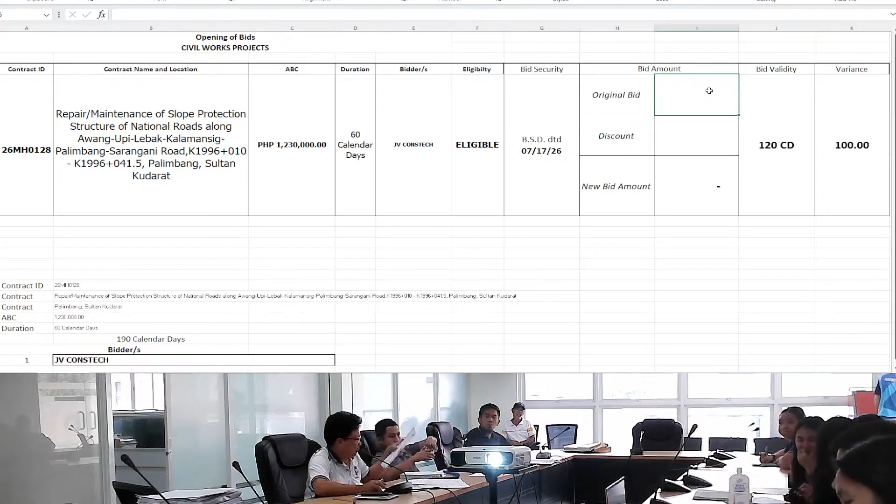For its bid offer, the total bid price of JV Constech for contract ID 26MH0128 is 1,228,300 pesos and 6 centavos. No discount offered.

Now we have no bid proposal to open. I would like to remind the bidders that your documents still undergo the post-qualification and the result of this bidding is still not final. And for the other matters from our BAC member, TWG or Secretariat.

For the information, we have a pre-bid conference today for July 22, 2026 for 10 projects. And also we have an opening of bids to be scheduled on July 28, Tuesday 2026 for 8 civil works projects.

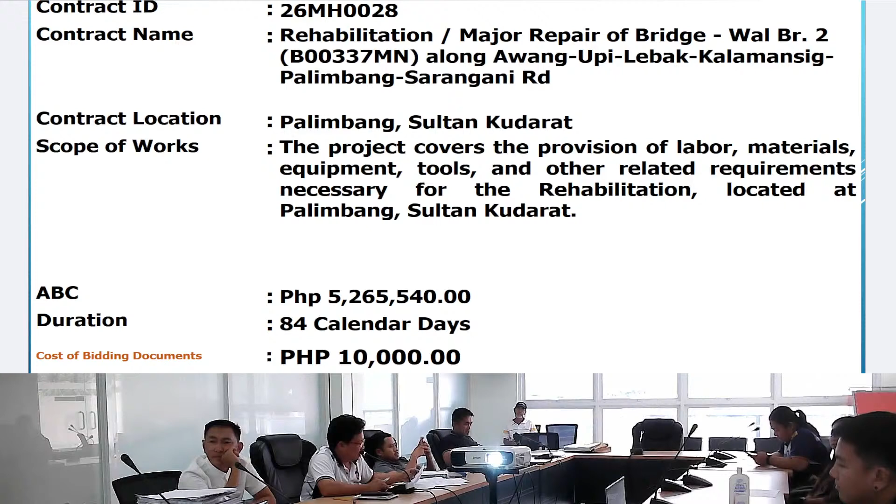Then 26 MH 0030, widening of bridge, Gapok Bridge, along Isulan Junction, Ninoy Aquino Road, with an ABC of 26,468,820 pesos. And 26 MH 0036, construction of concrete road to Kaabay Sirapinang Road, Bagumbayan, SK in support of the agri-based industries, pineapple, coffee, rubber, corn, and muscovado processing plant.

Station 14 plus 401 to Station 15 plus 176, Bagumbayan, Sultan Kudarat, with an ABC of 23,234,820 pesos. For the next project is the 26 MH 0037, construction, completion of bridge phase 3, Station 0 plus 00 to Station 0 plus 140, Barangay Kalamungog, Lebak, Sultan Kudarat, with an ABC of 24,125,000.

And for the next project is the 26 MH 0043, concreting of road, Barangay Kulaman, Barangay Kiadsam, Barangay Midtungok, Station 0 plus 00 to Station 1 plus 00, Senator Ninoy Aquino, Sultan Kudarat, with an ABC of 23,568,195 pesos.

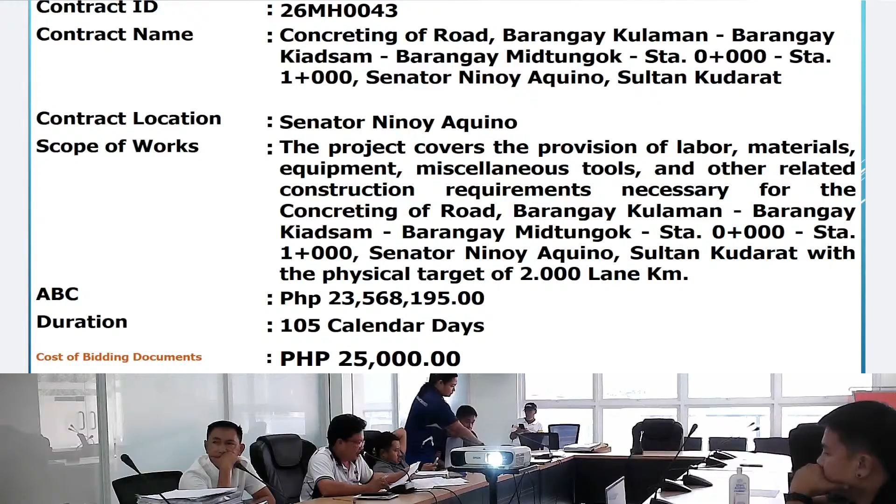And for the next project is the 26 MH 0044, construction of drainage structure along road, Station 0 plus 00 to Station 0 plus 650, Barangay Santa Maria, Kalamansig, Sultan Kudarat, with an ABC of 4,230,455 pesos.

For the next project is the contract ID 26 MH 0064, construction of multipurpose building, Barangay Kapilan, Lebak, Sultan Kudarat, with an ABC of 6,930,000. And for the next project is the 26 MH 0094, construction of multipurpose building, Barangay Batang, Baglas, Palimbang, Sultan Kudarat, with an ABC of 4,950,000.

And for the rest project is the 26 MH0123, improvement of DPWH Sultan Kudarat Second District Engineering Office, main building, Lebak Sultan Kudarat, with an ABC of 34,300,000. So now I will give the floor to the planning engineers for the basic contract data as well the discussion of plans.

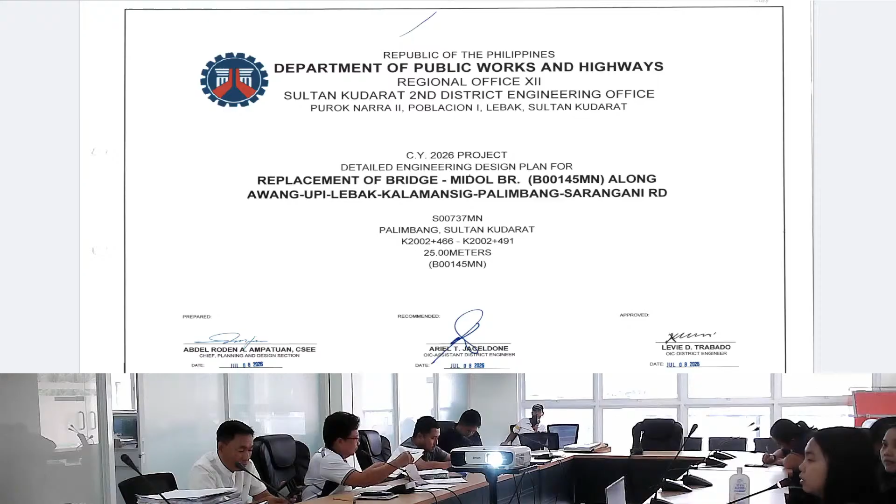So we have here with a physical target of 25 meters. So here is the index of sheets. And the summary of quantities for the individual removal of trees with 150 to 300 mm diameter small, we have 8 each. For the removal of structures or obstruction for steel, we have...

23,724.53 kilograms. For the removal of structures or obstruction for concrete, we have 63.32 cubic meters. For the structural excavation of common soil, we have 243.36 cubic meters.

For the bridge excavation for common soil, we have 59.61 cubic meters. For the shoring, cribbing, and related works, we have one lump sum. For the embankment from borrow common soil, we have 2,455.28 cubic meters. For the aggregate sub-base course, we have 518.93 cubic meters.

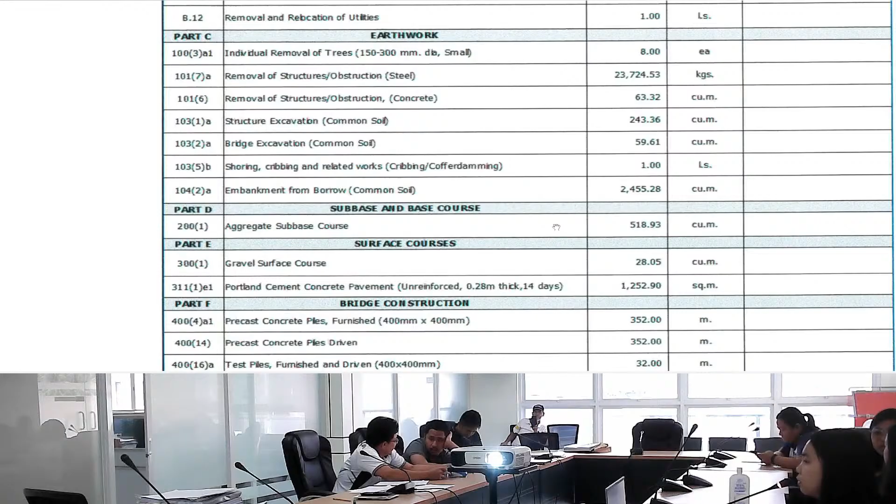For the gravel surface course, we have 28.05 cubic meters. For the Portland cement concrete pavement with 0.28 meter thick, we have 1,252.90 square meters. For the precast concrete piles furnished, we have 352 meters.

For the precast concrete piles driven, we have 352 meters. For the test piles furnished and driven, we have 32 meters. For the pile shoes, we have 24 each.

For the reinforcing steel grade 40, we have 2,483.22 kilograms. For the reinforcing steel grade 60, we have 39,347.20 kilograms. For the structural concrete, with 20.68 MPa, we have 5.44 cubic meters.

For the structural concrete with 27.58 MPa, we have 237.17 cubic meters. For the pre-stressed structural concrete members, we have 4 each. For the elastomeric bearing pads, we have 8 each.

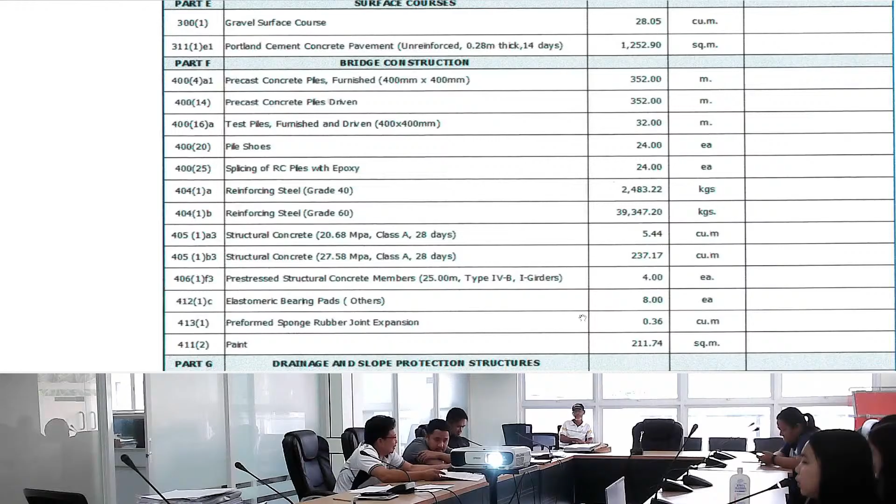For the pre-formed sponge rubber joint expansion, we have 0.36 cubic meters. For the paint, we have 211.74 square meters. For the grouted riprap, we have 344.50 cubic meters.

For the concrete for slope protection, we have 20.54 cubic meters. For the deck drain, we have 8 each. For the tapered solar LED roadway lighting, we have 6 each.

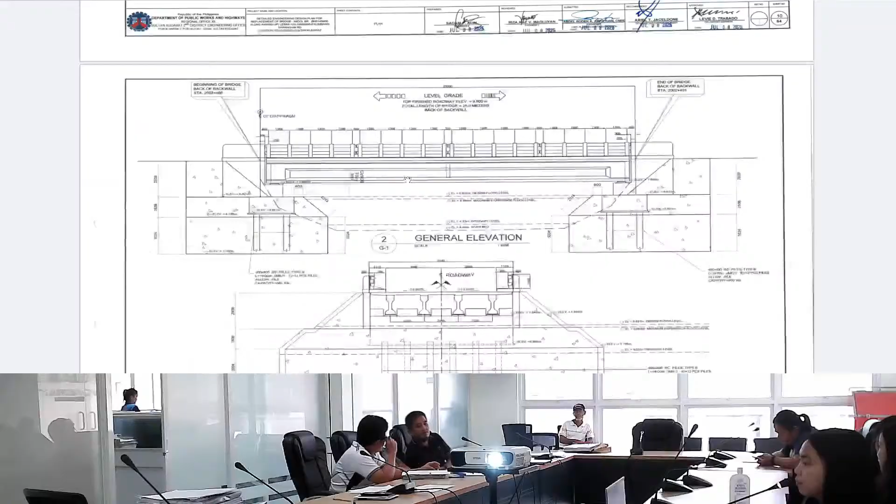So here is the quarry map, the vicinity map, the geolocation map of this project, the general notes, the topographic plan, the plan for the abutment, the general elevation and its typical section, the pile splice detail, the elevation, the pile tip for hard driving.

You have here the welded spiral tie splice detail in the notes. So we have here the framing plan showing top reinforcing steel bars and the framing plan showing the bottom reinforcing steel bars.

So we have here the longitudinal section, the transverse section at the middle of span, and the transverse section at support. So we have here the reinforcement schedule and estimated quantities for superstructures, the pre-stress girder elevation, the section at mid-span, section at end block, and the tooth at end view.

Here's the tooth detail, the end block reinforced detail, the dowels at the end and mid block. So we have here the girder design guide and the camber diagram.

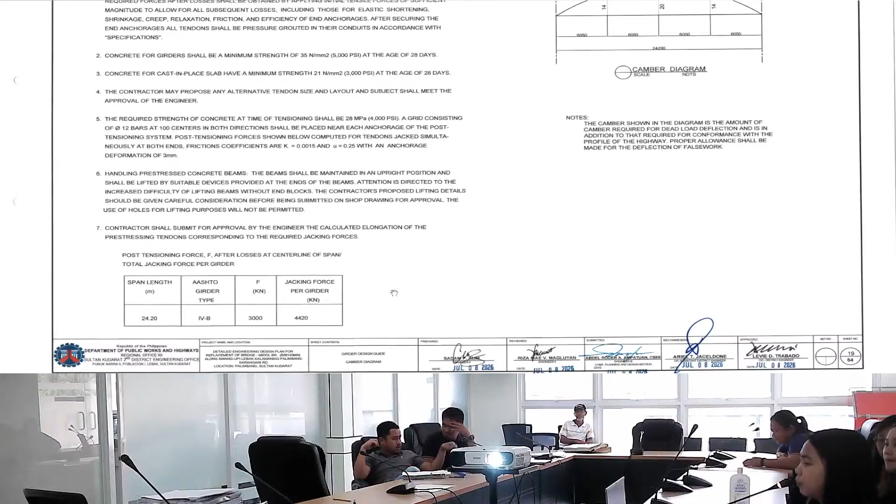We have here the details of diaphragm at the middle, its transverse section at abutment, the elevation and section, the reinforcement schedule and estimated quantities for superstructure, plan in the section, the elevation abutment detail, and the elevation wing wall detail.

You have here the pile cap plan section, the pile cap section, the shear block and riser plan, the shear block section, and the shear block and riser elevation.

We have here the reinforcement schedule and estimated quantities for abutment.

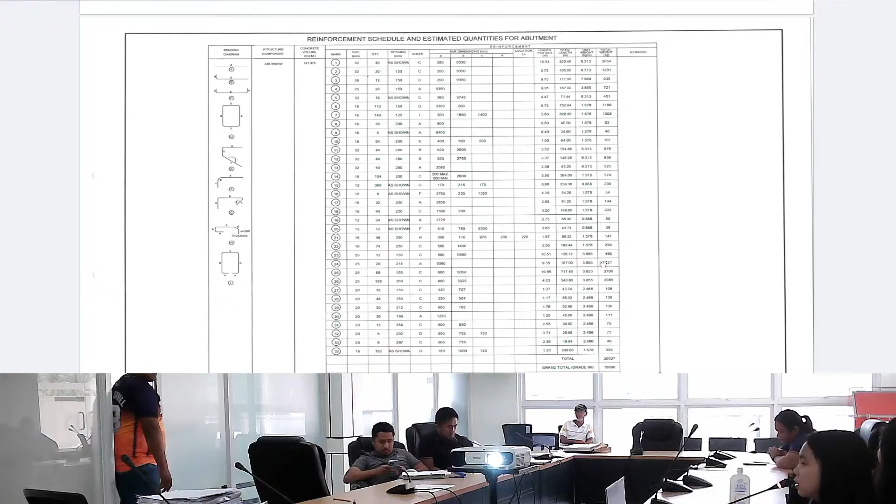We have here the plan for drain pipe, the sidewalk detail, its section, the typical drain details, its plan, and its section.

The approach slab plan and its section. We have here the reinforcement schedule and estimated quantities for the approach slab.

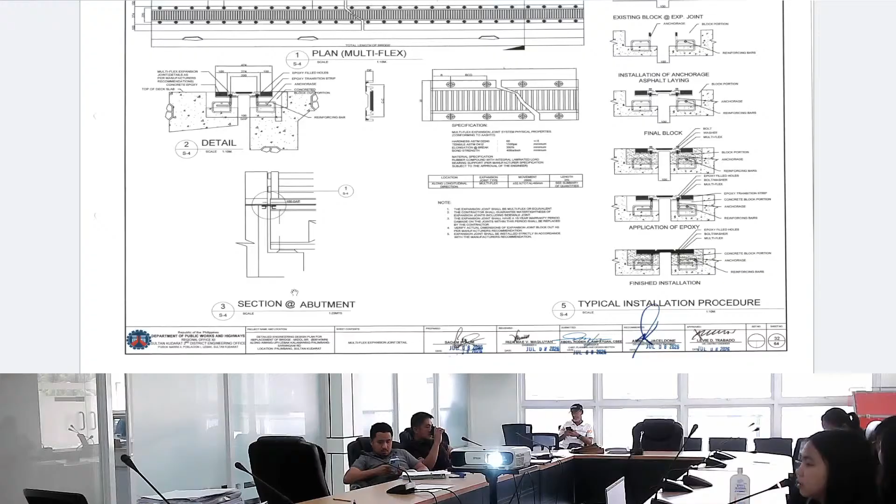We have here the Multi-Flex expansion joint detail, its section at abutment, and the typical installation procedure. Here is the reinforcement schedule and estimated quantities for approach slab.

We have here the general plan, standard painting on railing, sidewalk, and wing wall.

Here is the plan for the white paint, and the white paint on chamfer facing the center line and its rear elevation. So we have here the front elevation and the text detail.

We have here the details of abutment protection 1 and the details of abutment protection 2. We have here the bar bending diagram of abutment protection.

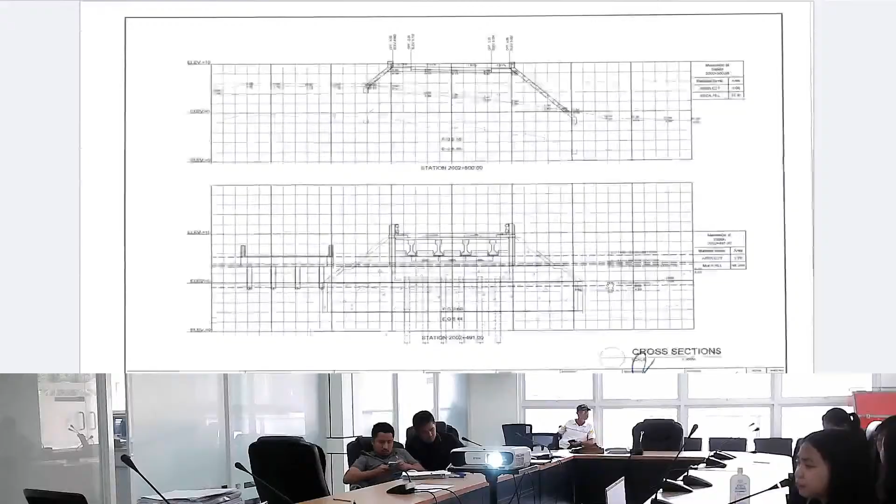The boring log, and the general plan. The cross sections, we have here the river profile.

We have here the typical road section and the typical roadway section, full super elevation. We have here the typical roadway section at grouted riprap slope protection.

We have here the grouted riprap typical detail and the detail of weep holes. We have here the detail of reinforced concrete RC pedestal, the detail of integrated solar street lights.

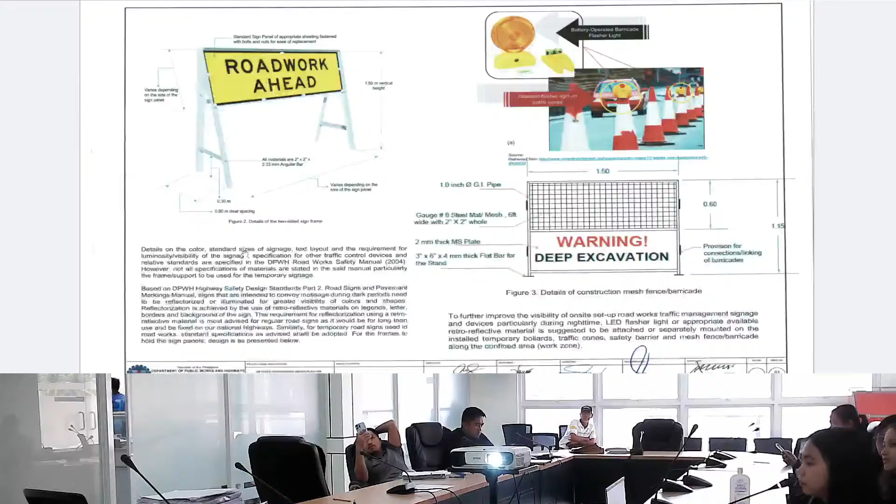We have here the traffic management plan, and the DPWH standard tarpaulin.

So the next is with the contract ID number of 26MH0030, with the contract name of widening of Bridge, Gapok Bridge B00613 MN along Isulan Junction to Ninoy Aquino Road, with the ABC of 26,468,820, with a physical target of 16.6 meters.

So for the summary of quantities, for the removal of actual structure obstruction, 910 mm diameter RCPC, we have 5 linear meter. For the removal of structures or obstruction concrete, we have 157 cubic meters. For the surplus common excavation, we have 510.51 cubic meters.

For the structure excavation of common soil, we have 134.16 cubic meters. For the bridge excavation common soil, we have 208.31 cubic meters. For the shoring, cribbing, and related works, we have 1 lump sum.

For the embankment from borrow of common soil, we have 177.45 cubic meters. For the subgrade preparation of common materials, we have 730.30 square meters.

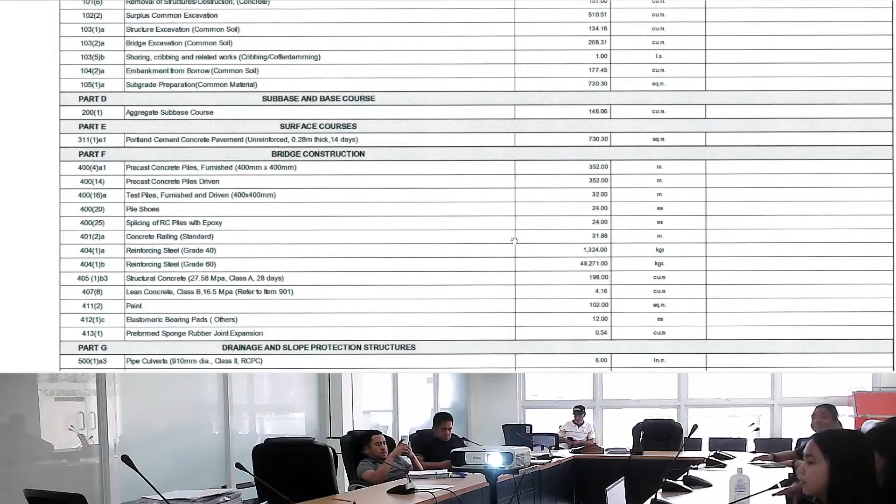For the pile shoes, we have 24 each. For the splicing of RC piles with epoxy, we have 24 each. For the concrete railing standard, we have 31.88 meters.

For the reinforcing steel grade 40, we have 1,324 kilograms. For the reinforcing steel grade 60, we have 48,271 kilograms. For the structural concrete, we have 196 cubic meters.

For the lean concrete, we have 4.16 cubic meters. For the paint, we have 102 square meters. For the elastomeric bearing pads, we have 12 each.

For the preformed sponge rubber joint expansion, we have 0.54 cubic meters. For the pipe culverts of 910 mm diameters, we have 6 linear meter. For the grouted riprap, we have 52.38 cubic meters.

For the sheet piles steel for slope protection, we have 246 linear meters. For the concrete for slope protection, we have 47 cubic meters.

For deck drain type 1, we have 8 each. For the reflectorized thermoplastic pavement markings white, we have 40.08 square meters. For the reflectorized thermoplastic pavement markings yellow, we have 40.08 square meters.

So we have here the index of sheet and the quarry map. Here is the location map, the vicinity map, and the geotag photo.

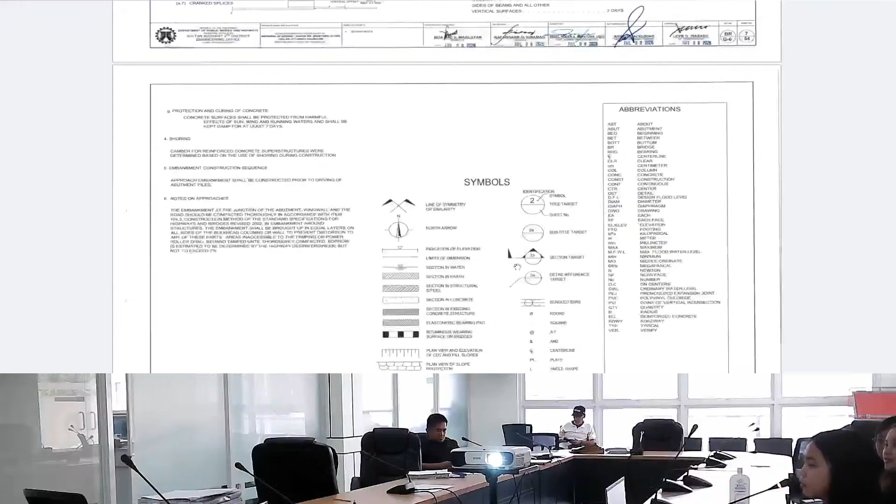So here is the topographic plan, the general notes, the general plan, the general elevation, and the typical cross-section at abutment A.

The cofferdamming detail, so here is the plan, the elevation, and its section. We have here the roadway profile and the river profile. The river cross-section.

We have here the bore log.

We have here the framing plan showing top reinforcing steel bars, and here is the framing plan showing bottom reinforcing steel bars and the longitudinal section. We have here the typical cross-section.

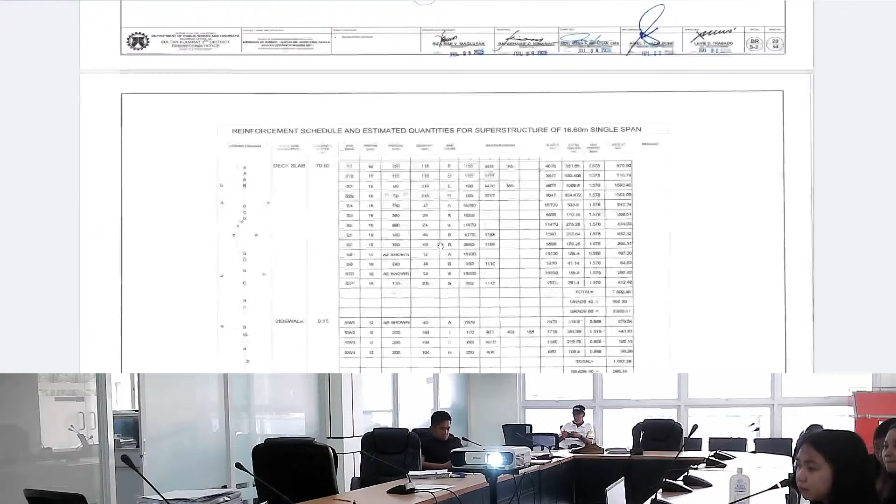Here is the diaphragm at support detail, its elevation, the section, and the intermediate diaphragm detail, along with its elevation and section.

Here is the reinforcement schedule and estimated quantities for superstructure of 16.6 single span, and its plan and section for the concrete pouring sequence.

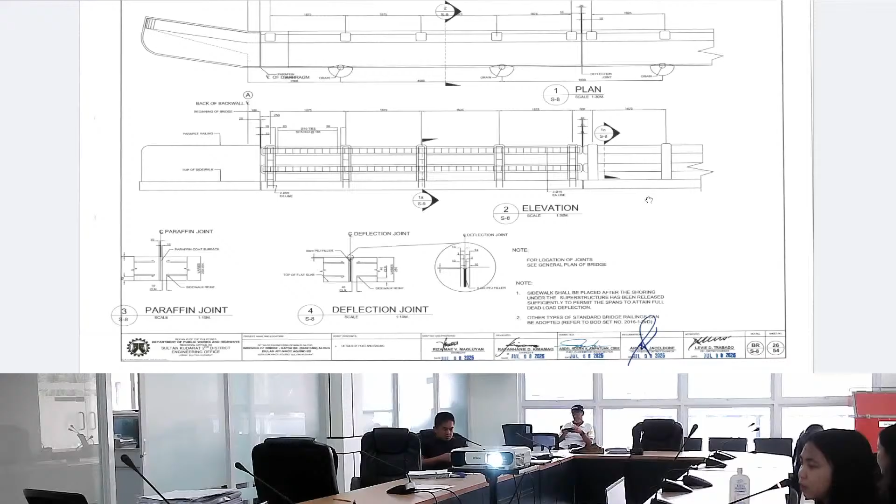Here we have the details of post and railings, the plan, the elevation, the paraffin joint, deflection joint, and the railing details, including the section, sidewalk detail, reinforcement schedule, and estimated quantities for railing.

Here is the typical drain details, its plan and section.

Here is the abutment plan, and in this area, the abutment section. Here is the pile cap plan, wing wall section, elevation of wing wall, and the shear block and riser plan.

Here's the reinforcement schedule and estimated quantities for the abutment, along with the pile elevation, pile splice detail, and the pile tip for hard driving.

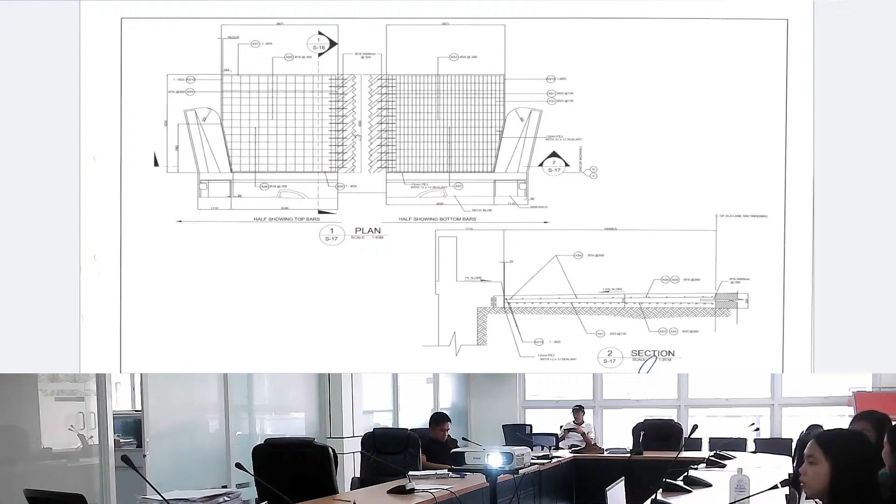We have here the approach slab detail, its plan and section, and the reinforcement schedule and estimated quantities for the approach slab.

We have here the plan for the standard painting, the road cross-section, and the typical roadway section in its quantity sheet.

We have here the abutment protection detail, the end cover of abutment protection section at abutment B downstream, and the details of the end cover of abutment protection at abutment B downstream section B.

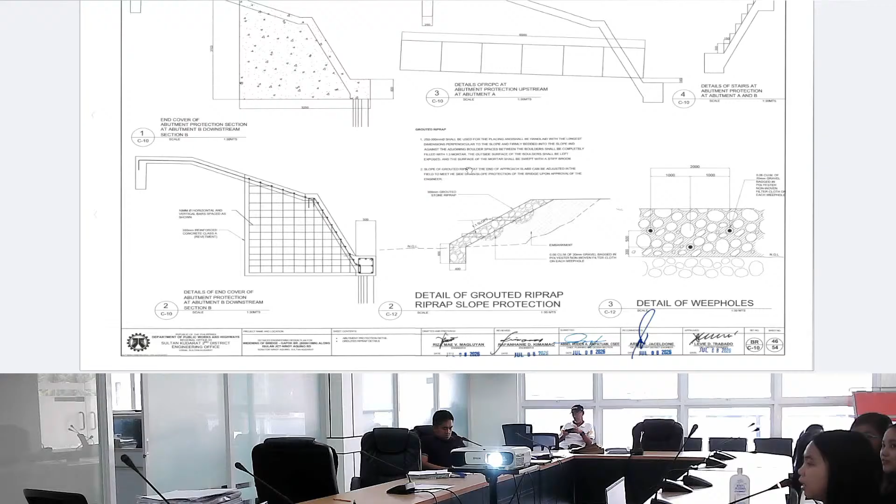Here is the details of RCPC at abutment protection upstream at abutment A, the abutment at A and B, and the detail of weep holes. We have here the detail of 1,220 mm diameter RCPC installation.

Here's the standard DPWH billboard.

Next is the contract with ID number 26MH0044, with the contract name: construction of drainage structure along road, station 0+00 to station 0+650, Barangay Santa Maria, Kalamansig, Sultan Kudarat, with a physical target of 0.650 kilometers. We have here the index of sheet and the quarry map.

For the summary of quantities: removal of actual structures or obstruction with 910 mm diameter RCPC, we have 6 linear meters. For removal of structures, obstruction concrete, we have 17 cubic meters. For unsuitable excavation, we have 521.59 cubic meters. For reinforcing steel grade 40, we have 5,781 kilograms. For structural concrete, we have 124 cubic meters. For pipe culverts of 910 mm diameter, we have 6 linear meters. For pipe culverts of 1,220 mm diameter, we have 6 linear meters.

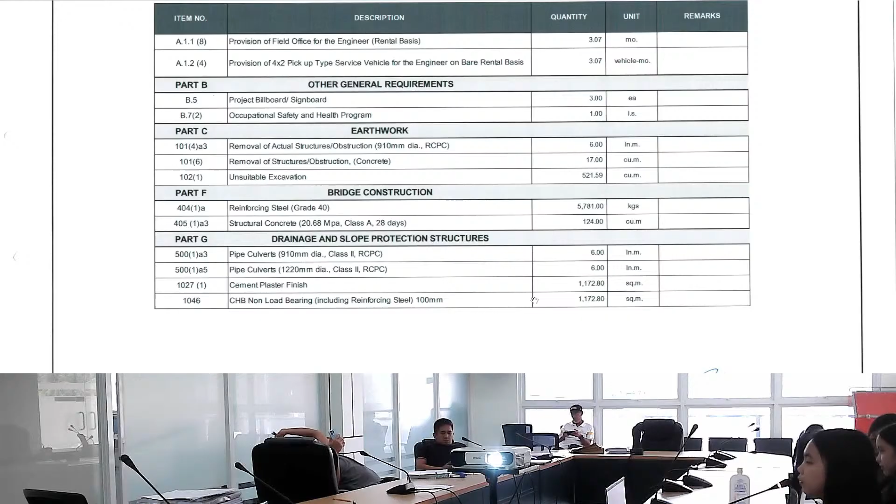We have here the general notes, the vicinity map of the project, the general plan, the geolocation plan, the typical sections at RCPC of 1,220 mm diameter junction, and the typical section of line CHB canal.

We have here the detail of the line canal, the typical section, the detail of the line canal, the line canal profile, the line canal traverse plan, and the typical section of the line CHB canal.

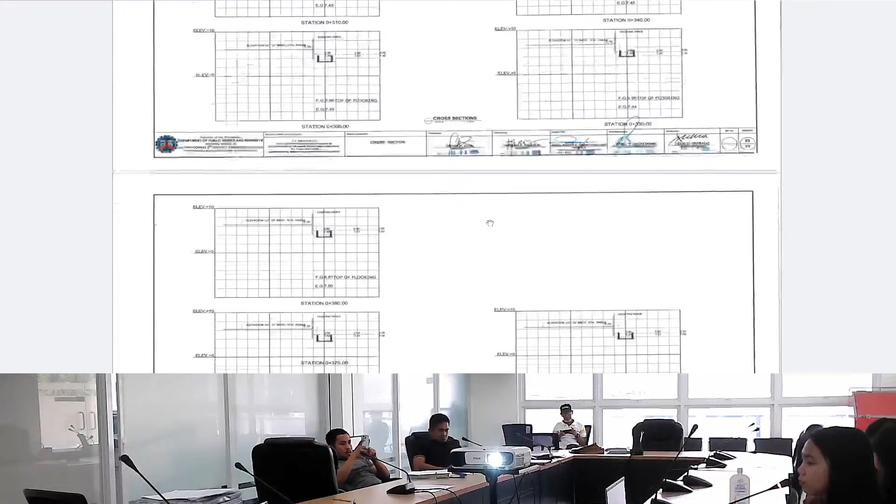We have here the cross sections, and the standard DPWH tarpaulin.

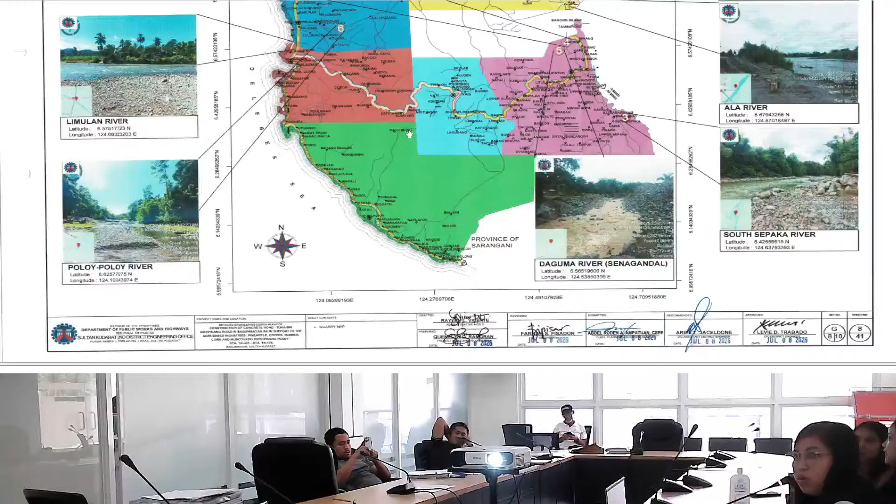Next would be the quarry map. And here is our summary of quantities.

For our earthworks, we have individual removal of trees, 150 to 300 mm diameter, small, we have 23 each. Unsuitable excavation, we have 1,748.42 cubic meter. Structure excavation common soil, we have 218.44 cubic meter.

Embankment from borrow, we have 1,451.99 cubic meter. And subgrade preparation common material natin, we have 7,134.40 square meter.

And for our sub-base and base course, we have aggregate sub-base course with 1,669.61 cubic meter. And for our surface courses, we have Portland cement concrete pavement.

Yung unreinforced one natin, we have 0.15 meter thick, 14 days, with quantity of 2,325 square meter. And for our Portland cement concrete pavement, unreinforced 0.23 thick, 14 days, we have 4,837.30 square meter. And next would be the reinforcing steel grade 60 natin.

We have 9,989 kilograms. And for reinforcing steel grade 40 natin, we have 5,908.60 kilograms. And for structural concrete, 20.68 MPa, class A, 28 days, quantity of 349.70 cubic meter.

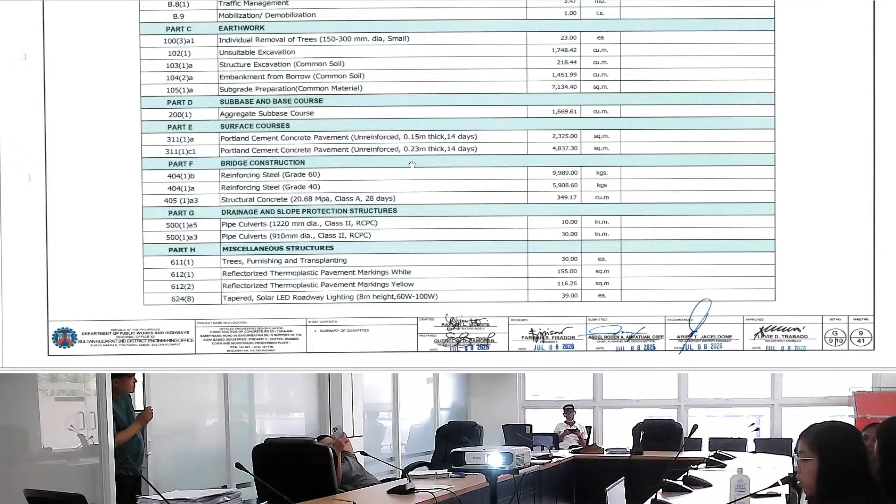And last, for our tapered solar LED roadway lighting, 8 meter height, 60 watts to 100 watts, we have 39 each. And next would be the quantity sheets of this project.

And next would be the typical roadway section. So we have RCBC and RCPC here, and we have canal. Next would be the straight line diagram of this project.

And next is the traverse plan and center line profile of this project. So makikita po natin dito yung stationings po, kung saan po na nakalagay yung mga RCPC and then yung RCBC po natin.

So next would be the typical pavement po ng ating PCCP. Next is the geometric design standards.

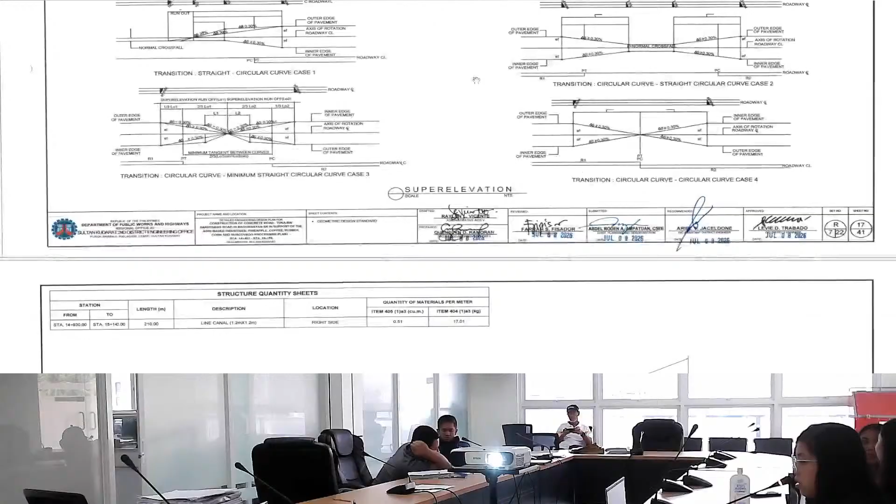And here is the detail of our reinforced concrete line canal with concrete planks po. So nandito rin po sa upper side, sa left side yung kanyang station limits.

Next would be the detail of our catch basin. And next would be the detail of our landslide protection na retaining wall po natin.

And the detail of 910 mm diameter, 36 inches RCPC installation. So ito po yung sa detail na installation po ng RCPC. Next would be another detail po ng RCPC natin.

And nandito rin po yung schedule ng drainage po, yung kung anong station pong ilalagay po yung RCPC. Next would be the detail ng RCBC po natin, yung box culvert po natin.

So, ang next po ang RCBC detail po ng wing wall. And next would be the cross-sections of this project.

Detail po ng solar street light po natin. So, eto po yung mga general notes po ng street lights. And next would be the detail of pavement markings.

Next is ang traffic management po natin. Yung mga signages po natin sa site po, nandito po. And lastly, yung DPWH project billboard po at saka yung sa COA.

So next project we have contract ID of 26MA0037 with the construction completion of bridge phase 3, with the station 0+00 to station 0+140 at Barangay Kalamungog, Lebak, Sultan Kudarat, with an ABC amount of 24,125,000. And here is the detailed engineering design plan of this project.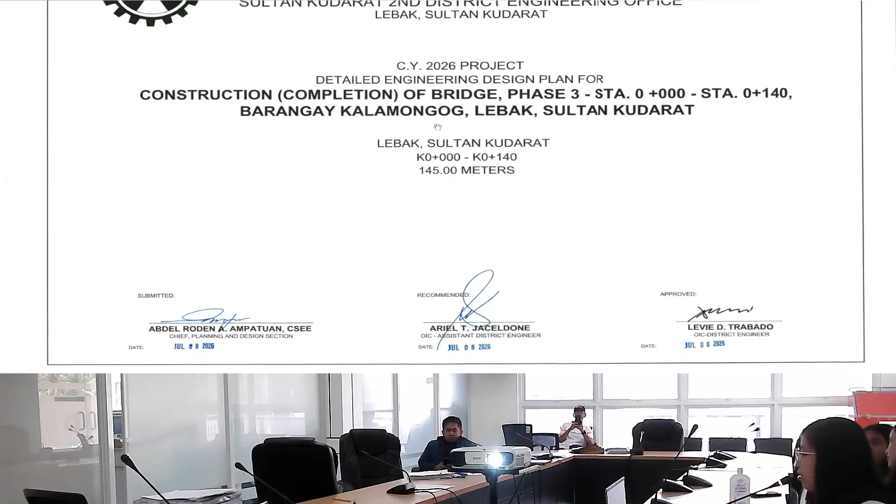So, phase 3 na po ito. Nandun na po yung hanging bridge natin. And then, mga additional po ito na structures po.

So, for our summary of quantities, we have earthworks, individual removal of trees, 301 to 500 mm diameter small. We have 10 each. Removal of structures of obstruction steel, 3,213.60 kilogram. And for removal of structures, obstruction concrete, we have 1 cubic meter.

And for structural excavation common soil natin, we have 357.70 cubic meter. And for bridge excavation common soil, we have 1,406.21 cubic meter. And for shoring, cribbing, and related works, cribbing and cofferdam, 1 lump sum.

Embankment from borrow, structure excavation common soil, we have 1,072.90 cubic meter. And for embankment from borrow na common soil, we have 487.38 cubic meter.

And next would be the precast concrete piles furnished natin, 400 mm by 400 mm, 273 meters. And for the precast concrete piles driven, 273 meters. Test piles, furnished and driven, 400 by 400 mm, 24 meters.

Piles shoes po natin, we have 27 each. And splicing of RC piles with epoxy, we have 11 each. Structural steel furnished, fabricated, and erected grade 50, we have 9,271.78 kilogram.

For structural steel furnished steel painting works, we have 1,126 square meters. For reinforcing steel grade 40, we have 179 kilograms. And for steel grade 60, we have 10,360 kilograms. And for structural concrete, 27.58 MPa, Class A, 28 days, we have 128 cubic meters.

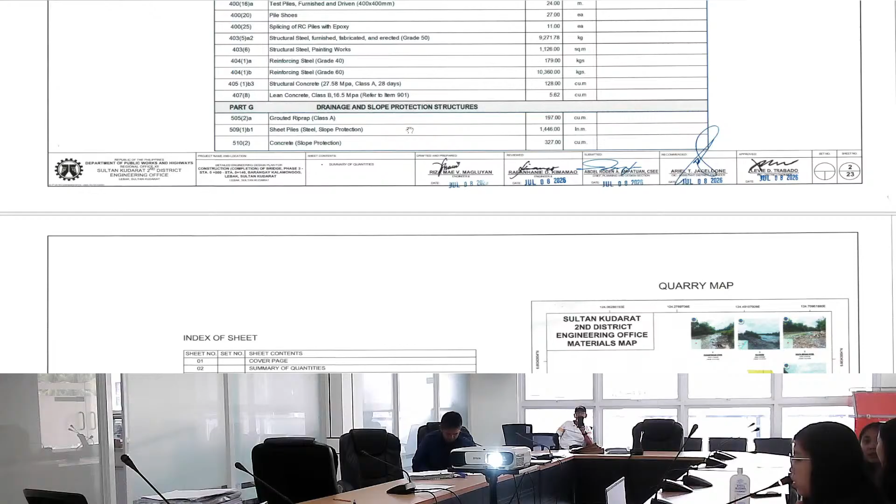For the drainage and slope protection structures, we have grouted riprap Class A, 197 cubic meters. And for the sheet pile steel slope protection, we have 1,446 lineal meters. For concrete slope protection, we have 327 cubic meters.

Next would be the index of sheets, quarry map. And next is the location map and the vicinity map. And next page will be the topographic map of this project. Next is general notes, abbreviations and symbols. Next is the general plan and general elevation of this project.

And next is the typical transverse elevation of this project. So this one has existing structures here, so it's just additional for our phase 3.

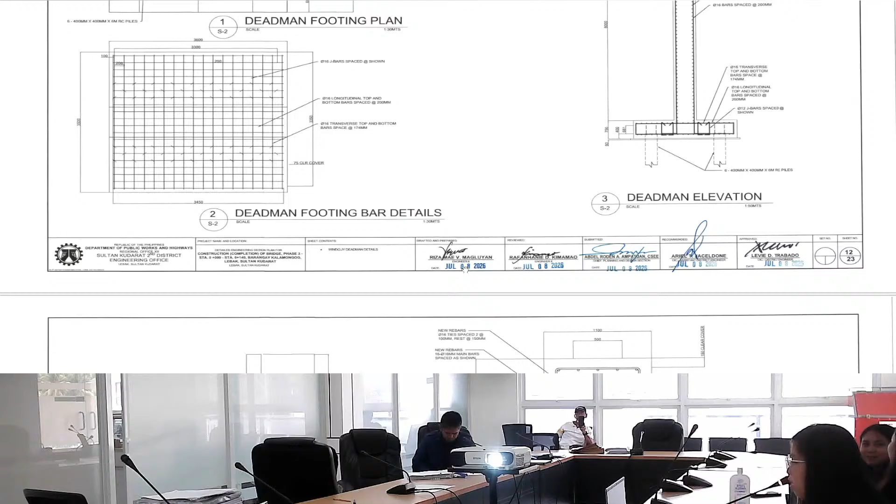This is the detail of the wind guy. Next would be the detail of the deadman, its bar details and its plan, and also its elevation.

Next would be the wind guy at Pier 1 upstream elevation. Wind guy repair details - there's a repair here at the wind guy portion.

Next would be the detail of the pile, the splicing. Next would be the detail of the piles still, the welded spiral tile piles details.

Next would be the pier protection detail. This is additional since it's for phase 3. Next would be the pier protection detail.

And here we have the grouted riprap detail. And this is the detail of the debris barrier.

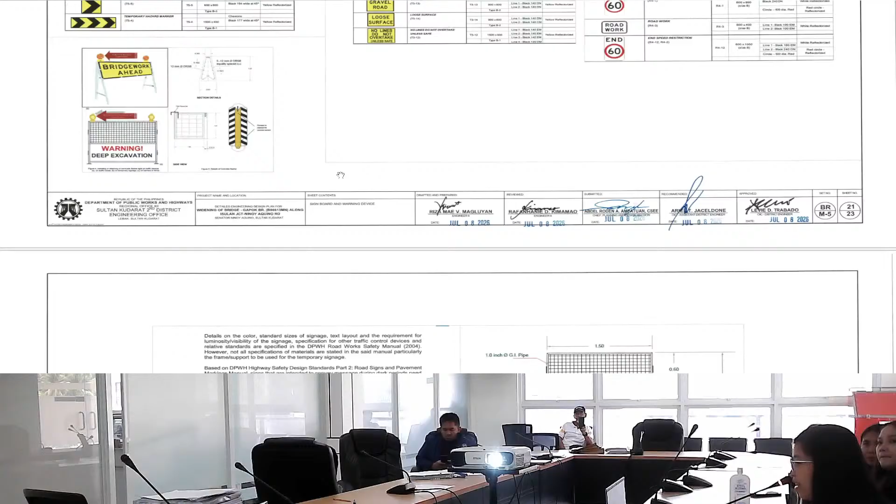And next, lastly, is the DPWH project billboard. Next would be the warning signs. And lastly, the traffic management plan of this project.

So we have 26 MA0043, concreting of road at Barangay Kulaman, Barangay Kedsam, Barangay Midtungok with a station of 0+00 to station 1+00, located at Sen. Ninoy Aquino, Sultan Kudarat with an ABC amount of 23,568,195 pesos. So here is the detailed engineering design plan of this project.

Next would be the index of drawing, the vicinity map and the location map of this project, general notes, legend symbols and abbreviations, general notes, another general notes, quarry map of this. And next would be the summary of quantities.

For earthworks, we have individual removal of trees, 150 to 300 mm diameter, small, we have 10 each. For structure excavation common soil, we have 1,080.01 cubic meters. And for embankment from borrow of common soil, we have 3,155.47 cubic meters. And the subgrade preparation common material, we have 7,300 square meters.

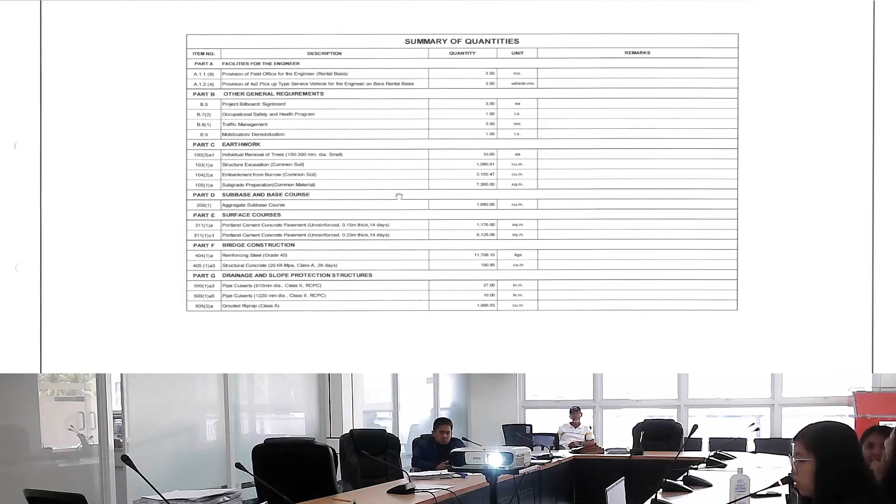For the base course, we have aggregate subbase course with 1,880 cubic meters. And for surface courses, we have the Portland cement concrete pavement unreinforced, 0.15 thick, 14 days, we have 1,176 square meters. And for Portland cement concrete pavement unreinforced, 0.23 meter thick, 14 days, we have 6,128.06 square meters.

And for our reinforcing steel grade 40, we have 11,708.10 kilograms. And for structural concrete, 20.68 MPa Class A, 28 days, we have 190.95 cubic meters. And for the drainage and slope protection structures, the pipe culverts, we have 910 mm diameter Class 2 RCPC, 27 linear meters.

And for pipe culverts, 1,220 mm diameter Class 2 RCPC, we have 10 linear meters. And for grouted riprap Class A, we have 1,006.55 cubic meters.

Next would be the quantity sheets of this project. And next is the typical roadway of this project. So we have RCBC here. And we also propose RCPC.

And we have grouted riprap structures. Next is the straight line diagram. And next is the plan and profile of this project, the traverse plan and also the center line profile.

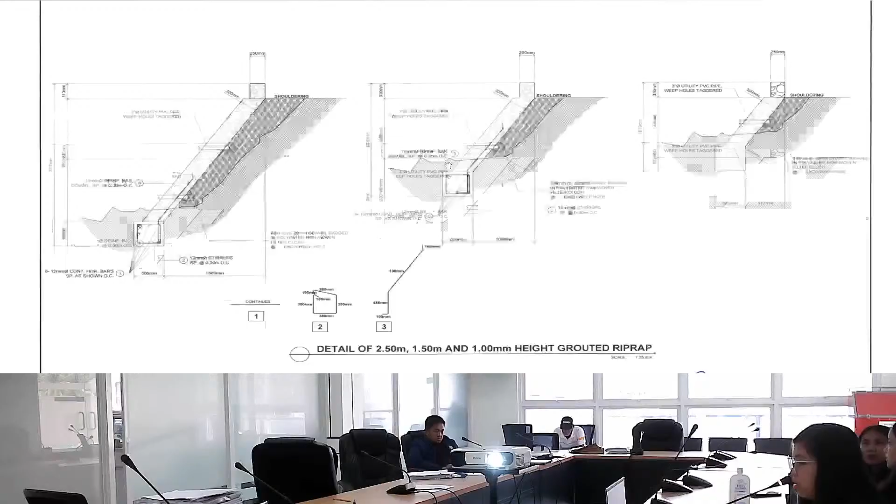Next would be the typical pavement details of this section. Next is the geometric design standards. And here is the detail of the grouted riprap. So we have 2.5 meters, 1.5 and 1 meter height grouted riprap here in our project.

Next would be the detail of the RCPC. And we have here the schedule of RCPC structure. Detail of the installation of the RCPC. Detail of the RCBC. And the cross-section of this project.

You can see here where the structures are located. And next would be the traffic management plan of this project, the warning signs, and lastly the DPWH Standard Project Billboard from DPWH and COA.

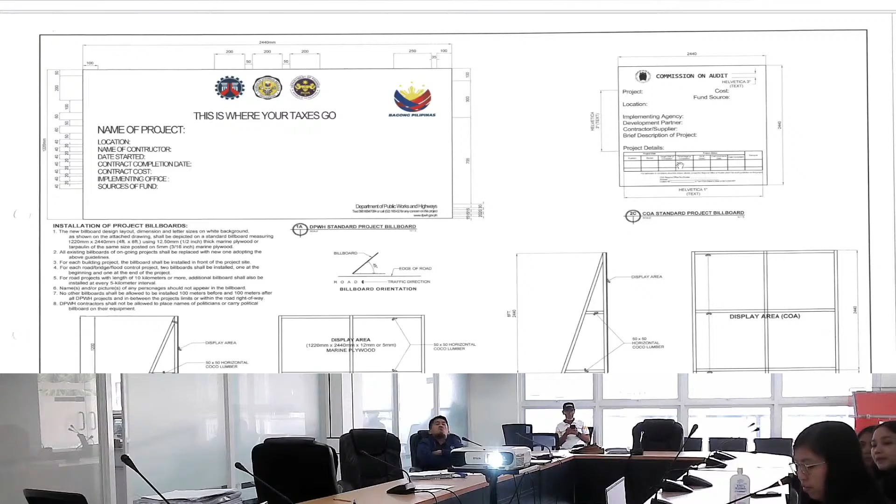So here is the detailed engineering design plan of this project. Here is the vicinity map and the topographic map of this project, and also the index of drawing. Next would be the symbols and abbreviations, general notes, and here is the summary of quantities.

For our earthworks, we have clearing and grubbing, 0.07 hectare. Removal of actual structural obstruction, PCCP unreinforced, 0.23 meter thick, we have 289 square meter. Removal of structural obstruction of concrete, we have 60 cubic meter. And for structural excavation, common soil, we have 68 cubic meter.

And sa embankment from borrow, we have common soil na 16.23 cubic meter. And sa surface courses, we have aggregate sub-base course, 57.62 cubic meter. And surface courses natin, we have Portland cement concrete pavement unreinforced, 0.28 meter thick, 14 days, 288.10 square meter.

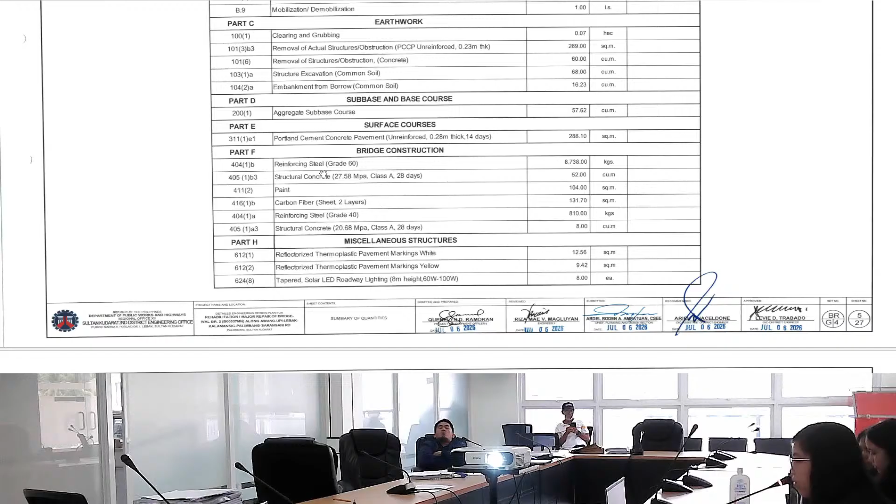Next would be the reinforcing steel, grade 60, we have 8,738 kilograms. Structural concrete na 27.58 MPa, class A, 28 days, we have 52 cubic meter.

And para sa painting natin, sa paint, we have 104 square meter. And sa carbon fiber sheet, 2-layer natin, we have 131.70 square meter. And sa reinforcing steel, grade 40, we have 810 kilograms.

Structural concrete, 20.68 MPa, class A, 28 days, we have 8 cubic meter.

And yung miscellaneous structures dito, we have reflectorized thermoplastic pavement markings white, 12.56 square meter. And sa reflectorized thermoplastic markings yellow, we have 9.42 square meter. And yung sa tapered solar LED roadway lighting natin, yung sa street light, 6 meters height, 60 watts to 100 watts natin, we have 8 each.

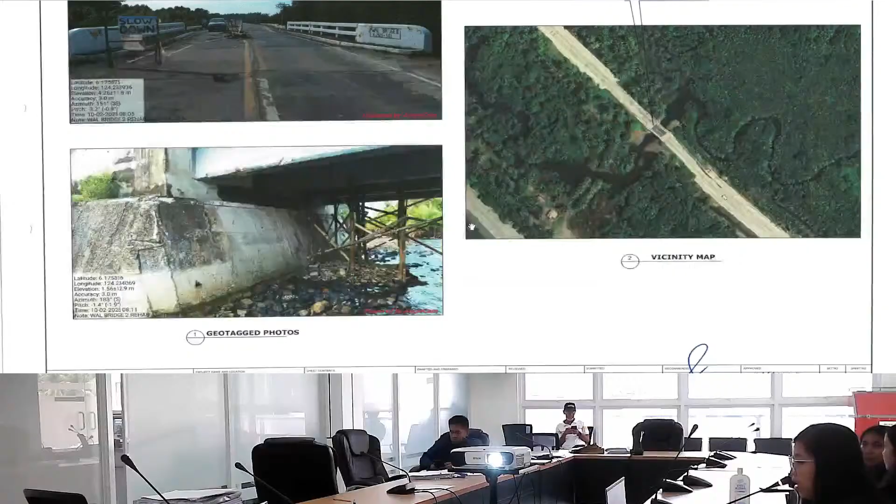And here is the geotag photos of this project. Magkakaroon po dito ng redecking.

Next page would be the carbon fiber sheet na detail. So itong sa bottom ng deck, sa pagkasabi ko kanina, lalagyan siya ng fiber sheet para mas strengthen yung deck slab niya.

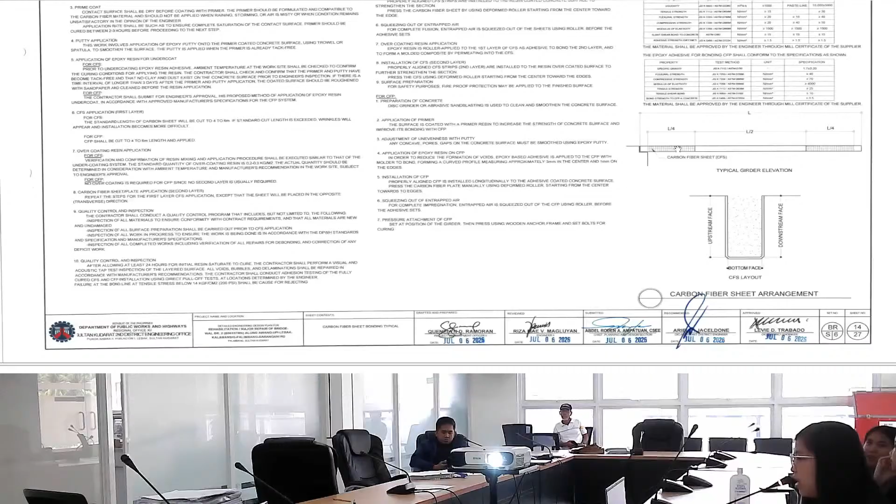Next would be the carbon fiber sheet sa girder naman. So ito naka-indicate at support, L/4 yung lalagyan ng carbon fiber sheet.

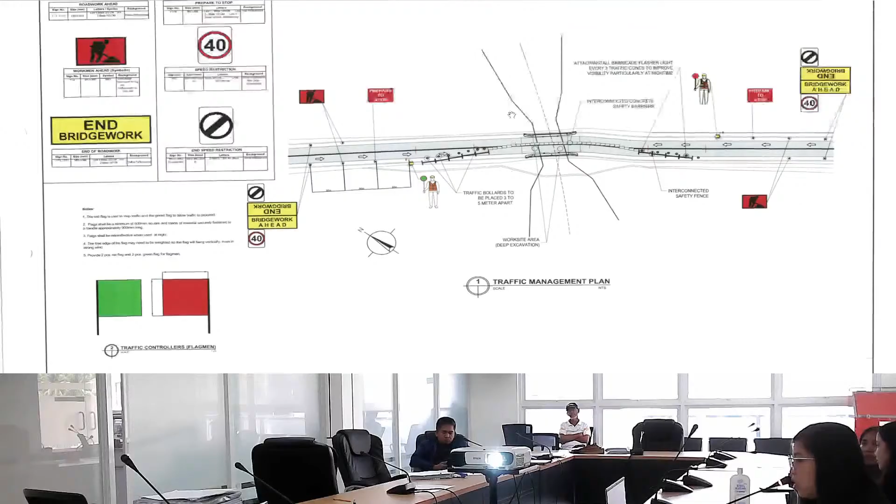Next would be the detail of pavement markings. And next would be the detail ng project billboard, traffic management plan nitong ating project, mga signages at ang mga warning signs. And lastly, yung details sa paint natin sa railings at saka sa wing wall niya na portion.

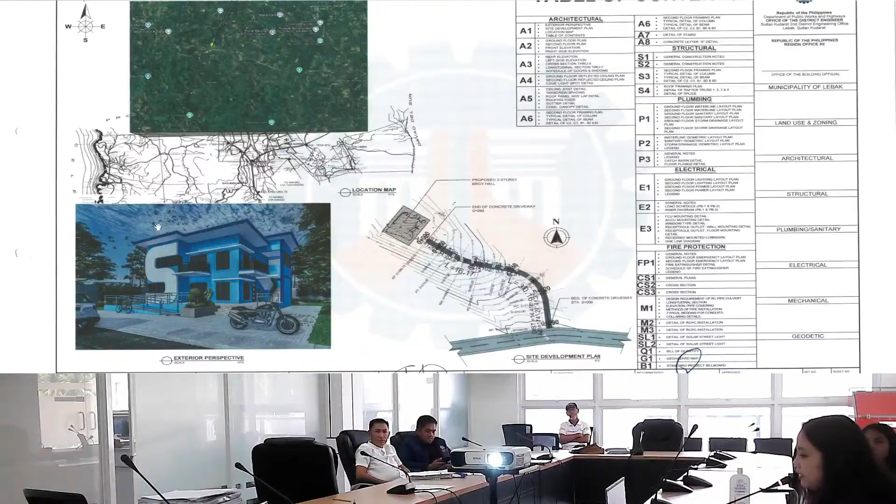So here is the detailed engineering design for this project. We have the location map, exterior perspective, site development plan, as well as the table of contents. Next, we have the front elevation, right side elevation, ground floor plan, and second floor plan, as well as the schedule of floor and wall finishes for reference.

Note: wall finishes must be applied with neutralizer, concrete seal or primer, patching compound, skim coat, and 2 coats of paint, semi-gloss latex. Ceiling finishes must be applied with glazing putty, flat wall enamel quick dry, and tinting color. For painting of steel structure, use gray oxide primer with catalyst before applying enamel paint. Use heavy-duty cylindrical door knob for door 3. Submit sample prior for the approval of barangay chairperson and DPWH representative or architect.

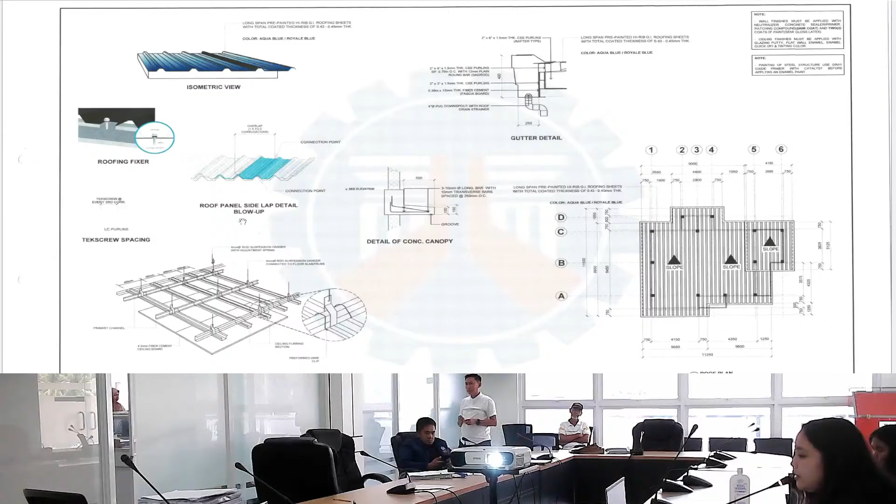Next, we have the reflected ceiling plan for ground floor and second floor, and the schedule of ceiling. Next, we have the roof plan, the typical detail of ceiling joists, isometric view of rib-type roof, roofing fixer, roof panel side lap detail, the blow-up, Tekscrew spacing, detail of concrete canopy, and the gutter detail.

Next, we have the details of stairs, its sectional elevation, its blow-up detail. Next, the concrete letter S detail, the front elevation section details.

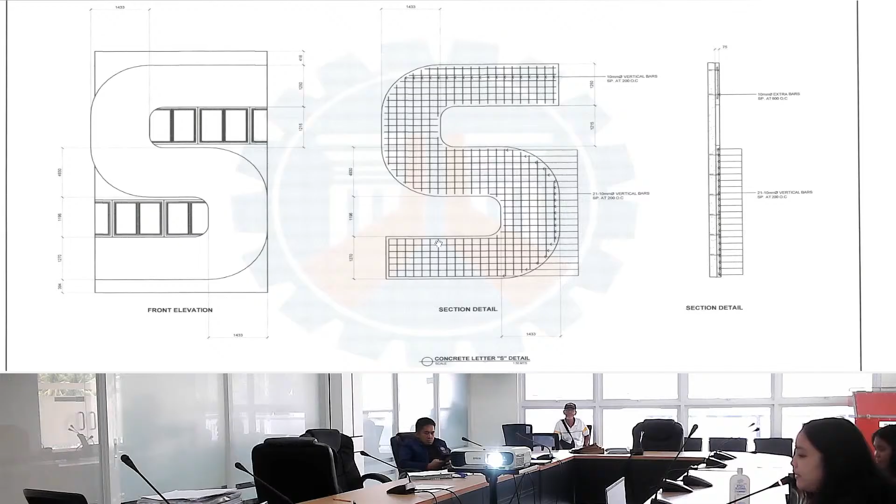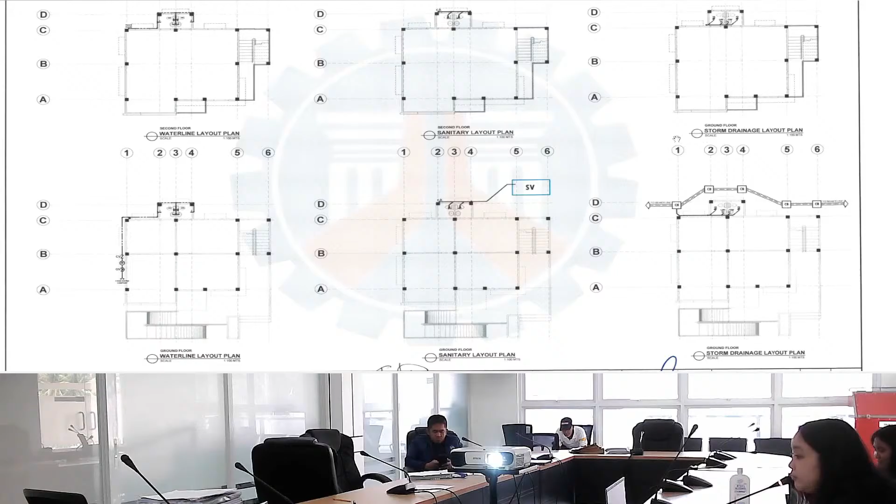Next, we have the waterline layout plan, second sanitary layout plan, and storm drainage layout plan for ground floor and second floor. And the isometric layout plan for sanitary, storm drainage, and water line, and the legend for reference.

Next, we have the catch basin detail, its cross-section, the floor flange detail, the PCD01 and PCT02 detail. And for reference, we have a 3,000 liter stainless steel water tank storage.

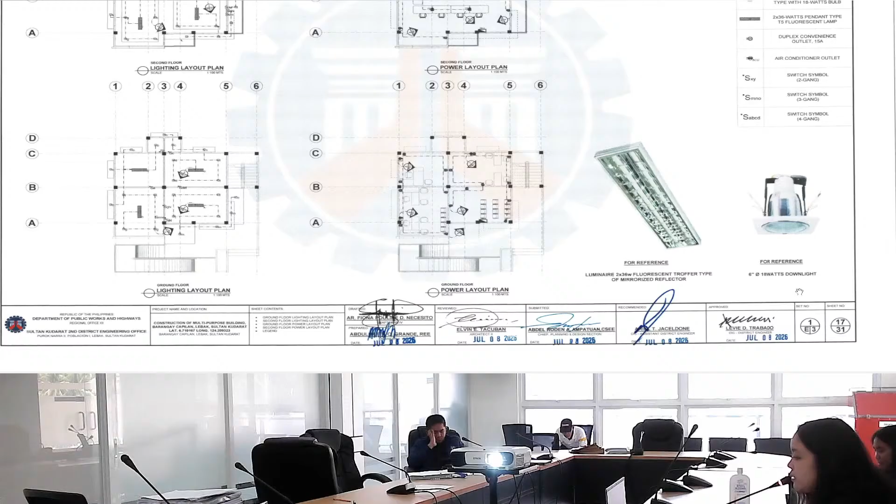Next is the lighting layout plan and power layout plan for ground floor and second floor. For reference, we have luminaire 2 by 36 watts, fluorescent troffer type of mirrorized reflector, and 6 inches diameter 18 watts downlight.

Next, we have the load schedule, the electrical riser diagram for panel board 2 and panel board 1.

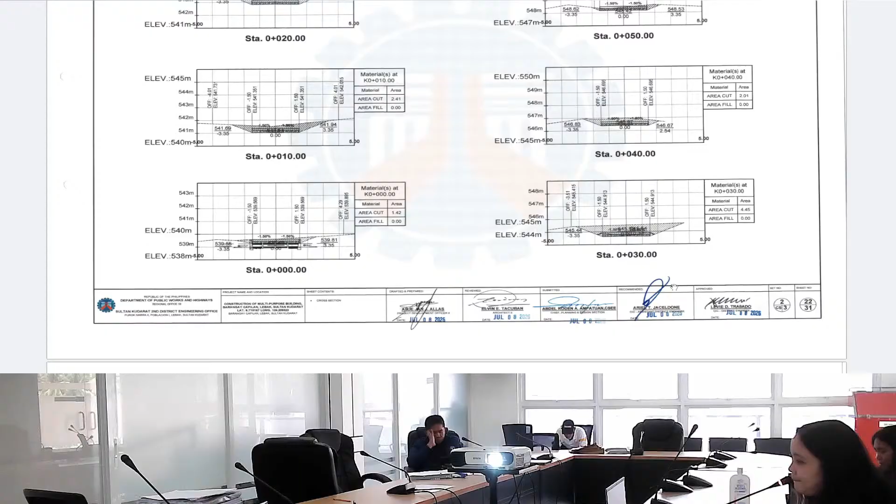Next, we have the window type AC detail, ACCU mounting detail, FCU mounting detail. The one-line diagram, the recessed mounted luminaire for reference, the panel board or distribution panel board for reference, the receptacle outlet, wall mounting detail for reference.

Next, we have the emergency layout plan for ground floor and second floor, and the fire extinguisher detail as well as the schedule.

Next, we have the traverse plan, the center line profile, and typical roadway section for normal crown. Here are these cross sections for each stations.

Next is the coloring details, minimum pipe covering, detail of pipe color, longitudinal section, its sections of RCPC, typical bedding for conduits, minimum pipe covering, methods of pipe installation.

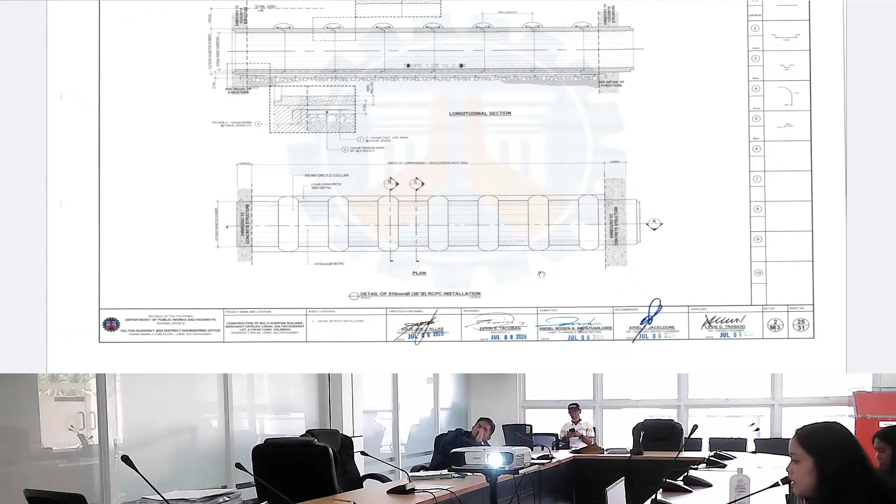Next, we have the detail of 910 millimeter diameter or 36 inches diameter RCPC installation, its plan and longitudinal section. Next is the typical bedding for RCPC with lean concrete, its cross-section, and the design requirement of reinforced concrete pipe culvert.

Next, we have the single arm post details. Note: include additional detail for desired lamp post to be used, and refer and verify to FIBECO standards. Second, refer to DPWH electrical technical specs for lamp post, wattage rating, mounting height, and spacing equivalent.

Next, we have the detail of integrated street light post, the detail of reinforced concrete pedestal, and the footing plan for the pedestal. Next, we have the projection, detail of projection pipe connection. We have two types of connection.

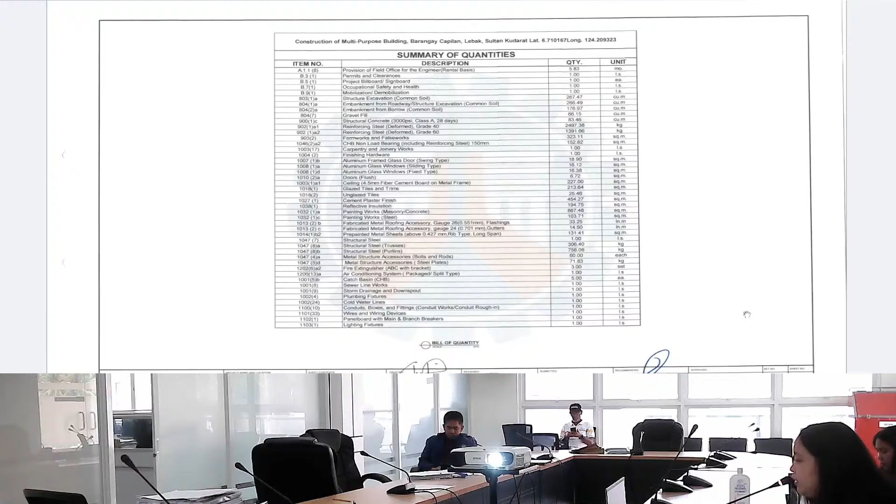For the summary of quantities: for structure excavation, we have 267.47 cubic meters. Embankment from roadway or structure excavation, 266.49 cubic meters. Embankment from borrow, 176.97 cubic meters. Gravel fill, 66.15 cubic meters.

Structural concrete, 3,000 psi, Class A, 83.46 cubic meters. Reinforcing steel, grade 40, 2,497.38 kilograms. Reinforcing steel, grade 60, 1,391.66 kilograms. For formworks and falseworks, we have 323.11 square meters.

For CHB non-load bearing, 150 millimeters, 132.82 square meters. For carpentry and joinery works, 1 lump sum. Finishing hardware, 1 lump sum. For aluminum frame glass door, swing type, 18.90 square meters.

For aluminum glass window sliding type, 15.12 square meters. For aluminum glass windows fixed type, 16.38 square meters. For doors flush, we have 6.72 square meters.

For ceiling, 4.5 millimeter fiber cement board, 227 square meters. For glazed tiles and trims, 213.64 square meters. For unglazed tiles, we have 25.46 square meters.

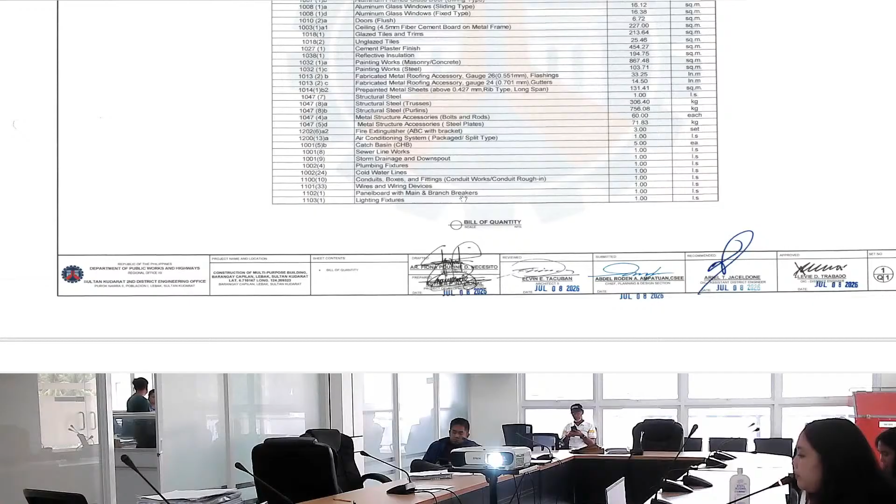For fire extinguisher, 3 sets. For air conditioning system, 1 lump sum. For catch basin, 5 each. For sewer line works, 1 lump sum. For storm drainage and downspout, 1 lump sum. Plumbing fixtures, 1 lump sum. For cold water lines, 1 lump sum. For conduits, boxes, and fittings, 1 lump sum. For wires and wiring devices, 1 lump sum. For panel board with main and branch breakers, 1 lump sum. And lighting fixtures, 1 lump sum.

Next, we have the geohazard map for Municipality of Lebak and the standard project billboard for DPWH and COA.

The next project, with contract ID 26MH0094, is the Construction of Multi-Purpose Building, Barangay Batang Baglas, Palimbang, Sultan Kudarat, with coordinates of 6.344320 to 124.122574, and the approved budget for the contract is 4,950,000 pesos.

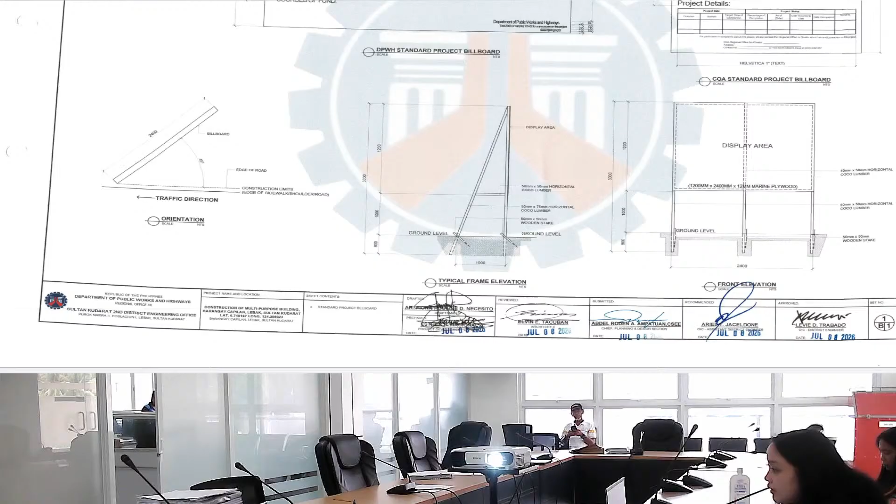Next, we have the floor plan and the schedule of floor and wall finishes.

Next is the note. We have the total floor area of the gym, 492.48 square meters. Note: wall finishes must be applied with a neutralizer, concrete seal or primer, patching compound, skim coat, and 2 coats of paint. And all concrete pedestal AG 304 deep forest painted finish.

Next, we have the left or right side elevation, sectional elevation through Y, and the details of girt and gutter.

Next, we have the detail of end cover, 2 units, the sectional elevation through X, as well as the detail of the louver. Next, we have the roof plan and the ramp detail.

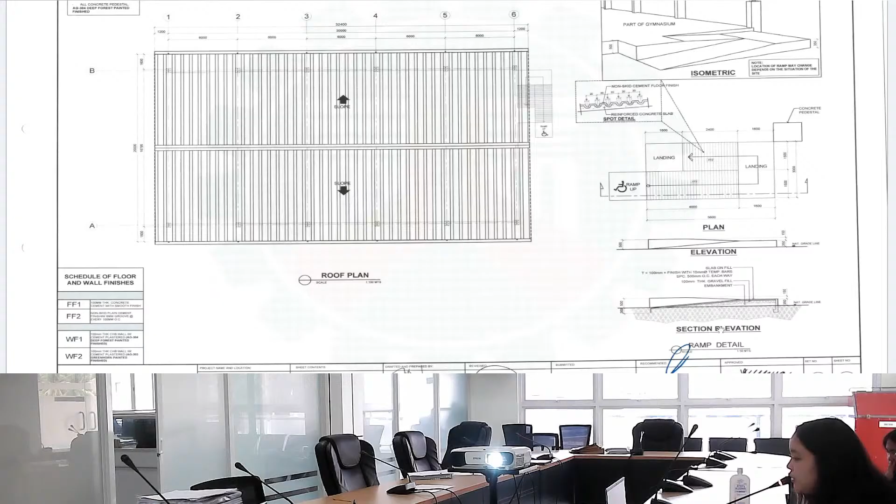Its elevation, plan, and isometric view, as well as the spot detail. Next, we have the general notes.

The foundation plan, detail of wall footing, and stiffener column. We have the detail of F1C1, the detail of base plate, the detail of girt, 2 units, and beam layout.

Next, we have the roof framing plan, the detail of strut, the reference weld detail, detail of girt 1, detail of splice for L bars and C purlins, the detail of sag rod, the isometric view, the tech screw spacing, roof panel side lap detail, roofing fixer, detail of sway brace, overlapping, and turnbuckle.

Next, we have the detail of truss assembly, detail 1 and 2, and detail 3 of truss connector plate, and detail of splice plate.

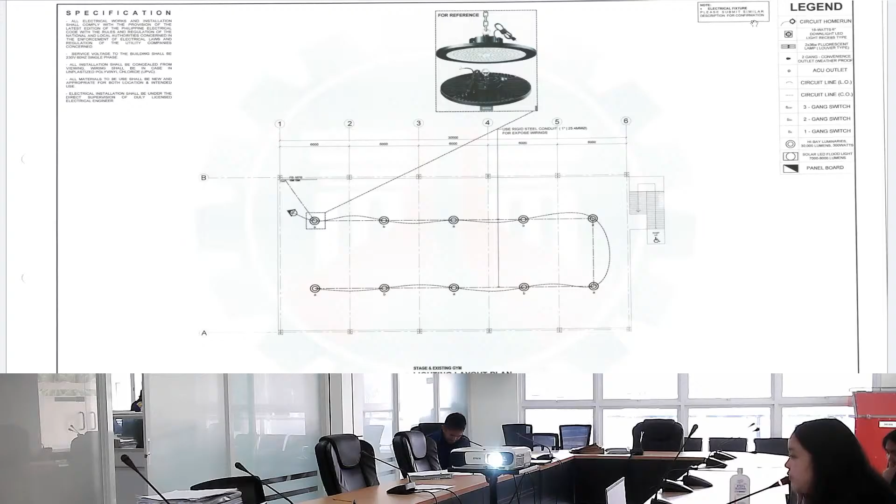Next, we have the lighting layout plan for the gym, its specification, and note: electrical fixture, please submit similar description for confirmation.

Next, we have the power layout plan and the wall mounting detail for receptacle outlet.

Next, we have the single line diagram, the panel board diagram, and the panel board or distribution panel board for reference, with its specification.

Next, we have the general notes and specifications, hybrid inverter specifications, solar panel specifications, legends and symbols for reference, the block diagram, its PV electrical design analysis, and its abbreviations.

Note: provide 1 set battery for the specification. First, lithium iron phosphate battery, 51.2 volts, 314 ampere-hours. 80 time cycle. Second, 5 years warranty. Third, Wi-Fi and Bluetooth control.

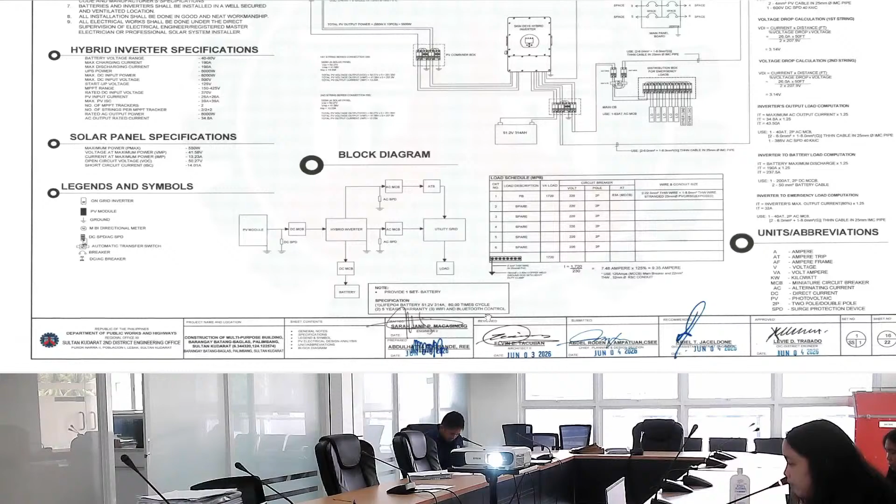Next, we have the fire extinguisher layout plan, the fire extinguisher detail and its schedule, as well as the general notes. The geohazard map for municipality of Palimbang.

For the summary of quantities: structure excavation, 71.4 cubic meters. Embankment from roadway or structure excavation, 47.86 cubic meters. Embankment from borrow, 123.24 cubic meters. For gravel fill, 55.50 cubic meters.

Structural concrete, 3,000 psi, 73.36 cubic meters. Reinforcing steel, grade 40, 1,760.42 kilograms. Reinforcing steel, grade 60, 1,443.96 kilograms. For formworks and false works, 81.78 square meters.

For CHB non-load bearing 100 millimeters, 75.78 square meters. For carpentry and joinery works, 116.88 square meters. For painting works, masonry, 116.88 square meters. For painting works, steel, 883.79 square meters.

For ridge or hip rolls, 32.4 linear meters. Next, we have gutters, 64.80 linear meters. For pre-painted metal sheets, rib type, 752.56 square meters.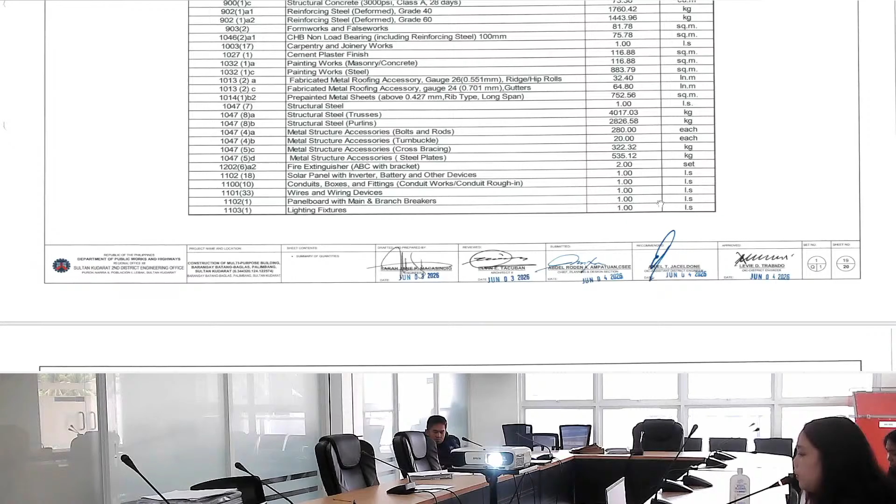For solar panel with inverter, battery, and other devices, we have 1 lump sum. For conduits, boxes, and fittings, we have 1 lump sum. For wires and wiring devices, we have 1 lump sum. For panel board with main and branch breakers, we have 1 lump sum. For lighting fixtures, we have 1 lump sum. And the standard project billboard for DPWH and COA.

For the last project, we have a contract ID of 26MH0123. The project name is Improvement of DPWH Sultan Kudarat 2nd District Engineering Office, Main Building, Libak, Sultan Kudarat, with the coordinates of 6.643298 to 124.07073. With the approved budget for the contract, 34,300,000 pesos.

So this is the detailed engineering plan for this project. We have its perspective, location map, the site development plan, as well as the table of contents.

Next, we have the ground floor plan with a total floor area of 797.9 square meters for ground floor and 814.65 square meters, with a total of 1,612.55 square meters. Note, wall finishes must be applied with neutralizer, concrete sealer or primer, patching compound, skim coat, and 2 coats of paint, semi-gloss, latex.

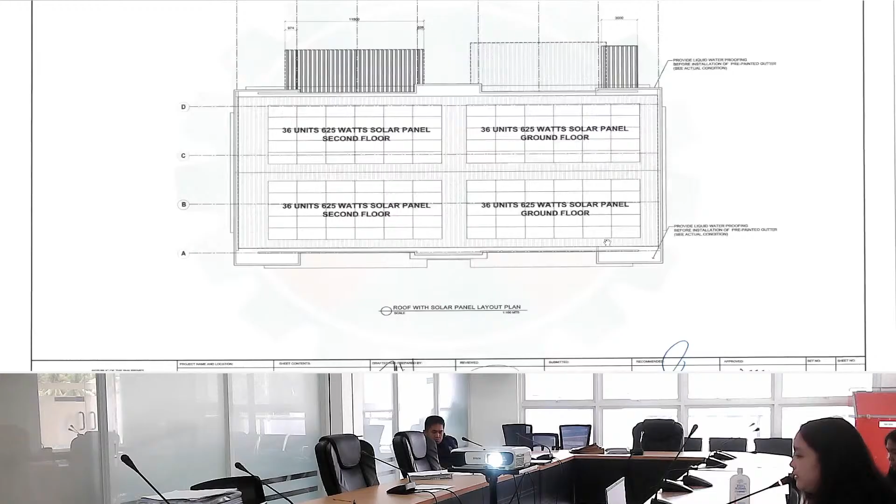For ground floor ceiling layout plan, we have 2 ceilings and the schedule of ceiling finishes, the second floor ceiling layout plan, the schedule of doors and windows, and ceiling joist details.

We have the fire exit stair detail, its elevation, plan and section, sitting area, section 4 and 5. Next is the conference room section.

For furnitures, we have the table detail for conference room, 21 units. For conference microphone, we have 21 sets with audio wire cord.

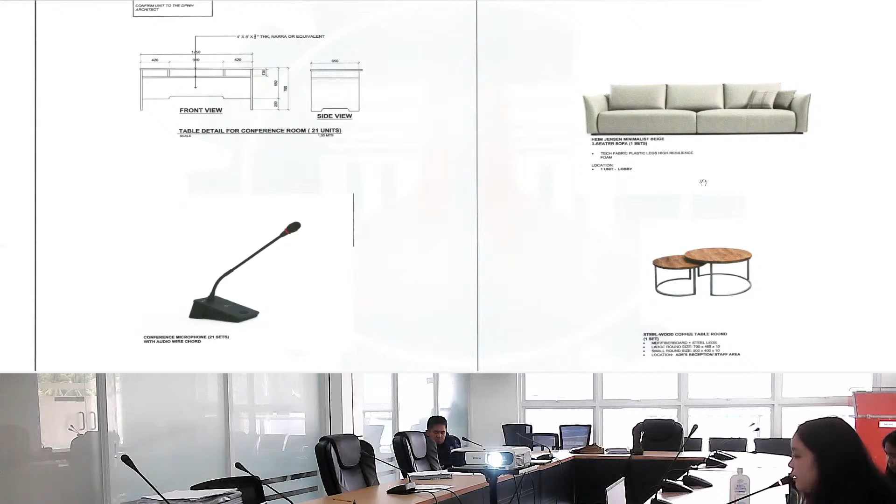Next, we have the Heim Jensen Minimalist Beige 3-seater sofa, one set. And steel wood coffee table round, one set. And note, provide 2 units, double door inverter, refrigerator, top and bottom. Location, one in admin chief and one in ADES or FS kitchenette.

Provide 1 unit, 6-seater dining table with seat with chair, hardwood. Location, dining area, second floor. Provide 1 unit, 4-seater dining table with chair, hardwood. Location, DE rest area. And provide 1 unit double bed, matrimonial with foam mattress with 2 set pillow. Location, DE's rest area.

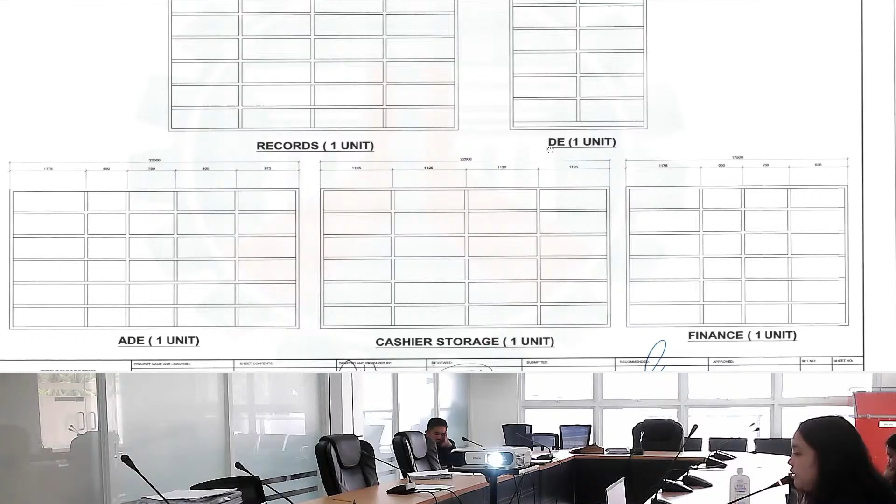We still have the continuation of furnitures for cashier storage, 1 unit for finance, 1 unit for ADE, 1 unit records, 1 unit DE, 1 unit. The general notes.

The beam layout plan, the foundation plan, the details of beams, we have 3. For footings, we have 2. And here's the detail for stair on fill and the section of wall footing.

Next, we have the typical detail of slab, the bottom bars and top bars for section AA and section B to B. Next, we have the roof framing plan, the foundation plan, the detail of sag rod, roof beam and lintel beam, and rafter 2 detail for second floor.

Next, we have the covered area detail. It's plan, roof framing, side view, and section C. And for girt, we have 1 unit.

Next, we have the waterways layout plan for ground floor, its specification. And note, embed pipes in tiles and use 3 inches diameter PVC downspout with roof drain strainer.

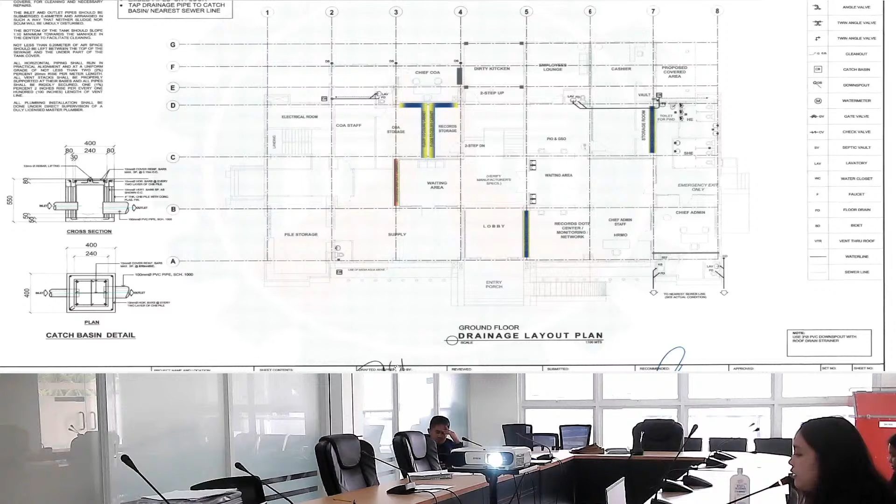Next is the waterways layout plan for second floor and its specification. Next, we have the drainage layout plan for ground floor, the catch basin detail and its cross-section, the specification, and note, embed pipes on floor, and tap drainage pipe to catch basin or nearest sewer line. Still use 3 diameter PVC downspout with roof drain strainer.

Next, we have the drainage layout plan for second floor. Next is the water layout plan for ground floor. And the water layout plan for second floor. The plumbing layout plan, isometric view, the detail of floor drain.

The water layout plan, continuation of water layout plan, isometric view. Next, we have the ground floor lighting layout plan, its specification, and for reference, the recess mounted luminaire.

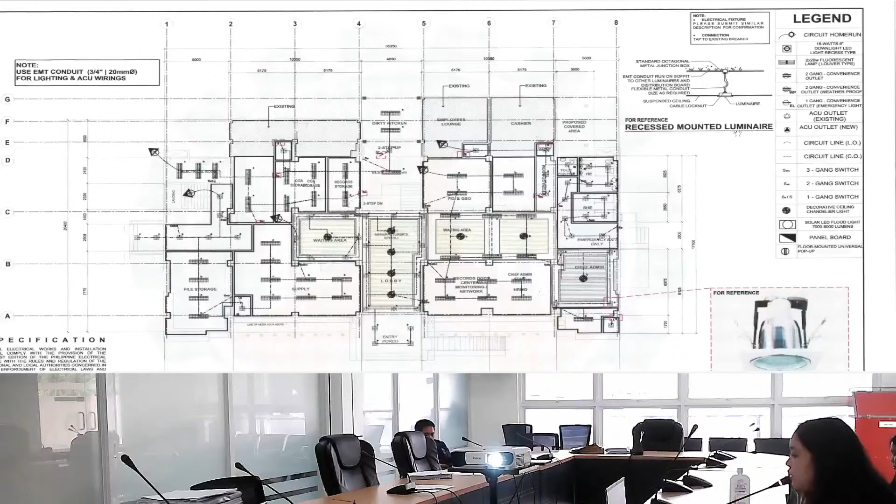Note, use EMT conduit 3/4 inches or 20 millimeter diameter for lighting and ACU wirings. And for electrical fixtures, please submit similar description for confirmation. And for connection, tap to existing breaker. Next, we have the second floor lighting layout plan with the same notes and specification.

The ground floor power layout plan and its specification. Note, use EMT conduit 3/4 inches, 20 millimeters diameter for emergency light outlet, and data or network line is separate from it. Use 20 millimeters diameter PVC pipe conduit.

Next is the second floor power layout plan, the wall mounting detail for reference, and its specification with the same note.

Next, we have the ground floor HVAC layout plan. Note, provide transfer switch, 2 units, 250 amperes with enclosure and pilot lighting for ACU connections from solar. Provide ACU drainage, use 25 millimeters diameter PVC pipe. Chip the walls to embed pipes. And provide isolated circuit breaker, 40 amperes, weatherproof protection in every compressor ACU.

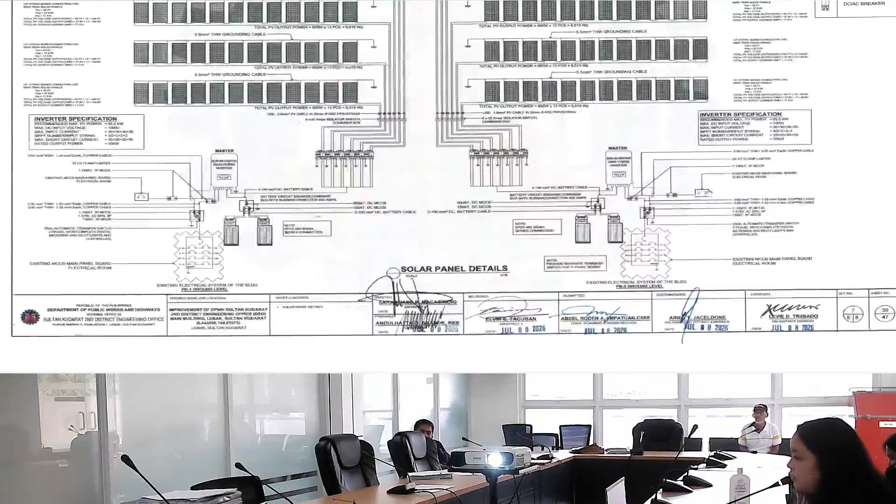And the second floor HVAC layout plan with the same notes. Next, we have the solar panel details and the inverter specification. Next, we have the general notes and specifications for the block diagram, the inverter specification, solar panel specification, and legends and symbols, units, and abbreviations for reference.

Next, we have the ground floor data or network layout plan with its specification and same notes. The second floor data or network layout plan.

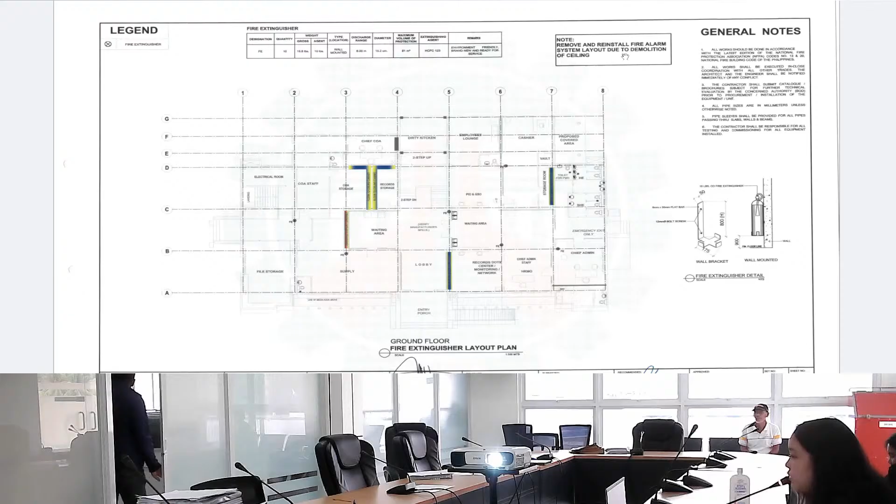Next, we have the fire extinguisher layout plan, the fire extinguisher detail and its schedule, as well as general notes. And note, remove and reinstall fire alarm system layout due to demolition of ceiling. The fire extinguisher layout plan for second floor.

Structure excavation, 31.80 cubic meters. For embankment from roadway, 23.74 cubic meters. Gravel fill, 6.56 cubic meters. Structural concrete, 3,000 PSI Class A, 23.39 cubic meters.

For reinforcing steel, grade 40, 1,329.16 kilograms. For reinforcing steel, grade 60, 1,051.72 kilograms. For formworks and falseworks, 153.95 square meters. For CHB non-load bearing, 100 millimeters, 417.27 square meters.

For carpentry and joinery works, 1 lump sum. For finishing hardware, 1 lump sum. For flush door, 7.56 square meters. For steel louver door, 1.89 square meters. For steel doors and frames, 1 lump sum.

For aluminum frame glass door swing type, 40.53 square meters. For aluminum glass windows sliding type, 7.2 square meters. For windows awning type, 0.89 square meters. For windows fixed type, 39.25 square meters.

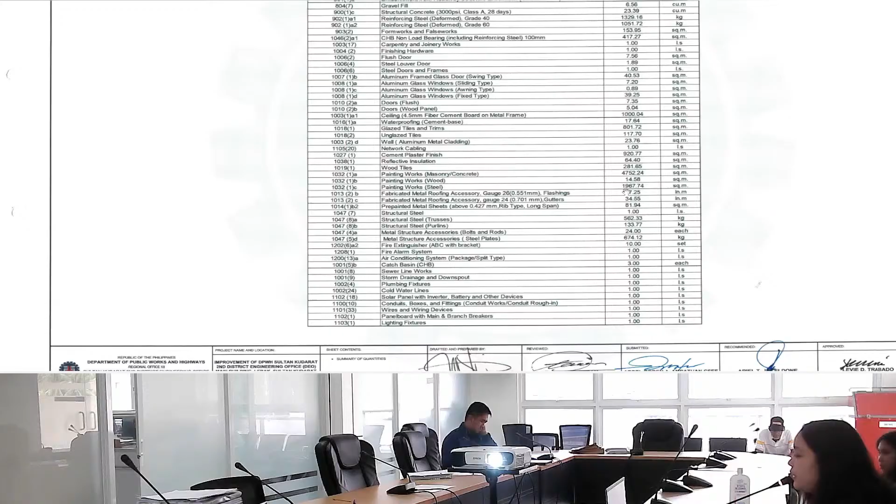For painting works, masonry, 4,752.24 square meters. For painting works for wood, 14.58 square meters. For painting works for steel, 1,967.74 square meters. For flashings, we have 17.25 linear meters.

For gutters, we have 34.55 linear meters. For pre-painted metal sheets, rib type, we have 81.94 square meters. For structural steel, one lump sum. For trusses, we have 562.33 kilograms.

For purlins, we have 133.77 kilograms. For bolts and rods, we have 24 each. For steel plates, we have 674.12 kilograms. For fire extinguisher, we have 10 sets.

For fire alarm system, we have one lump sum. For air conditioning system, split type, one lump sum. For catch basin, we have 3 each. For sewer line works, we have one lump sum. Storm drainage and downspout, one lump sum.

For plumbing fixtures, one lump sum. Cold water lines, one lump sum. Solar panel with inverter, battery, and other devices, one lump sum. Conduits, boxes, and fittings, one lump sum. Wires and wiring devices, one lump sum.

Panel board with main and branch breakers, one lump sum. Lighting fixtures, one lump sum. And the standard project billboard for DPWH and COA. And that concludes the presentation of the detailed engineering plans for this pre-bid.

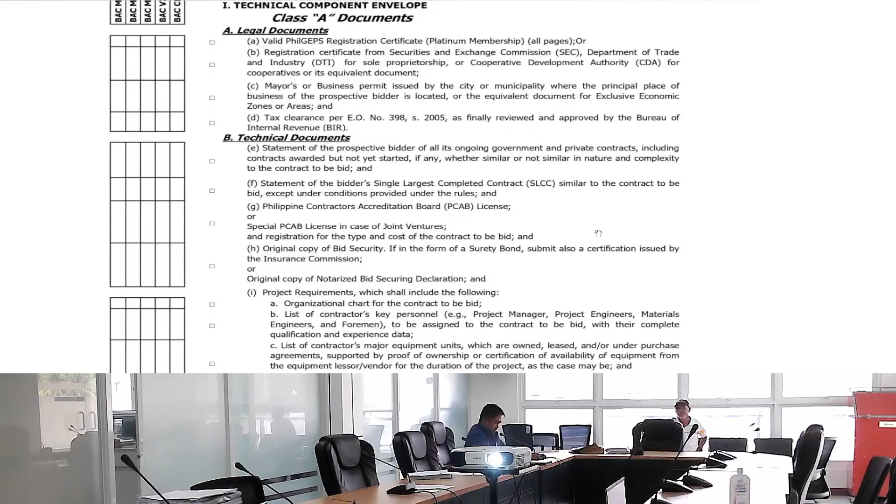Next, under the technical component envelope, there are also technical documents, which are: first, the statement of the prospective bidder of all its ongoing government and private contracts, including contracts awarded but not yet started, if any, whether similar or not similar in nature and complexity to the contract to be bid. This is a standard format, nothing to change, it's in our bidding documents.

Next, the statement of the bidder's single largest completed contract or SLCC, similar to the contract to be bid, except under conditions provided under the rules. This is also a standard format. You'll see the work category for the projects being discussed today, which is found in the bid data sheet of our bidding documents.

The SLCC should be related to the work category being bid, or the one you want to join. Next, the Philippine Contractors Accreditation Board License, or PCAB license, or special PCAB license in case of joint venture, and registration for the type and cost of the contract to be bid.

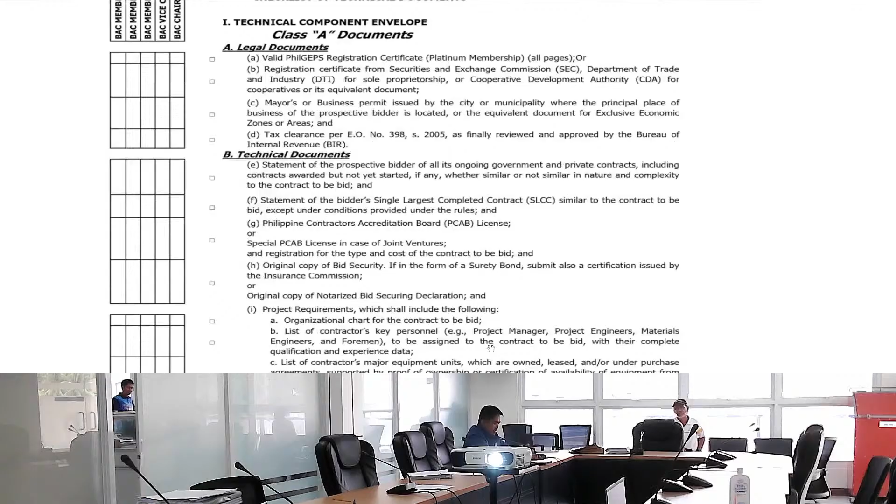Make sure it comes with a joint venture agreement. Next item required under technical documents is the original copy of bid security. You have the option to use a surety bond or a notarized bid securing declaration. If using a surety bond, also submit a certification issued by the Insurance Commission.

The next item required is the project requirements, which will include the following: the organizational chart for the contract to be bid, the list of contractor's key personnel. For example, the project manager, project engineers, materials engineers, and foremen to be assigned to the contract to be bid, with their complete qualification and experience data.

Next, the list of contractor's major equipment, as per DEO 11, series of 2017, regarding the inclusion of minimum testing materials equipment in the technical portion of the bid. This adds to our list of contractor's major equipment. So, our major equipment should also include laboratory apparatus that is part of our pledge.

Of course, proof of your having the minimum testing materials should be provided. For example, materials testing accreditation, or proof of purchase of materials testing equipment, like the delivery receipt and the OR reflecting the name of the firm on the OR. Of course, the materials testing certificate should be valid, so it can be used as supporting document that you have materials testing equipment.

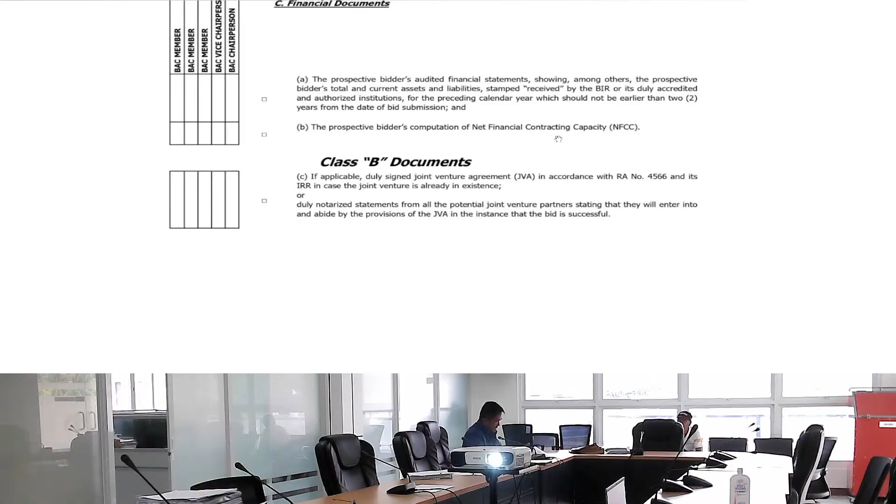Next, under the technical component envelope pa din, itong Class B documents, if applicable, as mentioned kanina dun sa Special PCAB License, ito naman yung Class B documents. If applicable, duly signed Joint Venture Agreement or JVA in accordance with RA number 4566 and its IRR in the case the joint venture is already in existence, or duly notarized statements from all the potential joint venture partners stating that they will enter into and abide by the provisions of the JVA in the instance the bid is successful. Yun po yung ating nilalaman ng ating technical component envelope.

So ano naman po yung other component envelope na nire-require? Ito po yung ating financial component envelope. Ano po mga documents na isasubmit ni bidder? Una, yung ating original duly signed and accomplished financial bid form. Take note po ito sa ating financial bid form, standard format po ito, meron po itong nakalakip dito sa ating bidding documents pag bumili po kayo or mag-download kayo. All you have to do is fill up yung mga data na kailangan, like your bid amount or yung discount kung meron man. And syempre pipirmahan po yung ating bid.

Next, other documentary requirements under RA number 12009, yung ating duly signed bid prices in the bill of quantities. Next, duly accomplished detailed estimates form, including a summary sheet indicating the unit prices of construction materials, labor rates, and equipment rentals used in coming up with the bid. And lastly, itong cash flow by quarter. So ito yung manipis-nipis lang na envelope ng ating part ng ating bid, which is the financial documents, or financial component envelope.